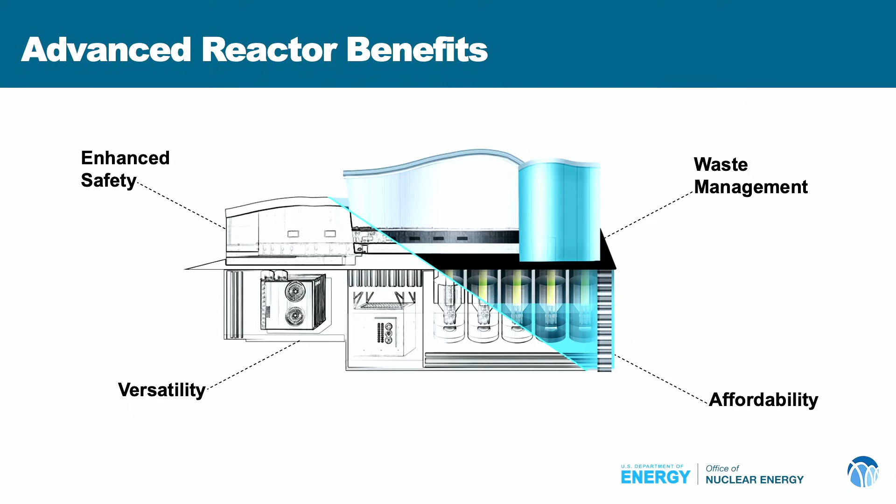But I'll have to paraphrase one Admiral Hyman G. Rickover, who, in the face of advanced reactor types long ago, many decades ago, said there's a difference between advanced reactors and the reactors that are operating today. I'll paraphrase him: advanced reactors are cheap and use off-the-shelf parts, and they're going to be smaller and more versatile and more affordable, but they're not being built today. Reactors that are built today, of course, are big and complicated, and they're stymied by seemingly simple engineering problems, and they are being built today.

This is approximately still true, though there's a slight distinction. A number of advanced reactors are being built today, and actually this week, one advanced reactor has gotten a certification from the NRC to proceed with construction for a test unit. We'll talk a little bit about the Hermes reactor very shortly, but I think the quote that has been so persistent in this space from Rickover is kind of nearing the end of its utility.

All right, so advanced reactor designs. I promise it'll get more complicated very soon, but let's start with this. If you were going to design an advanced reactor, you would be facing a number of key questions. Primarily, what do you want it to do? We'll call these the performance targets. You have a number of things you can fool with to reach those performance targets.

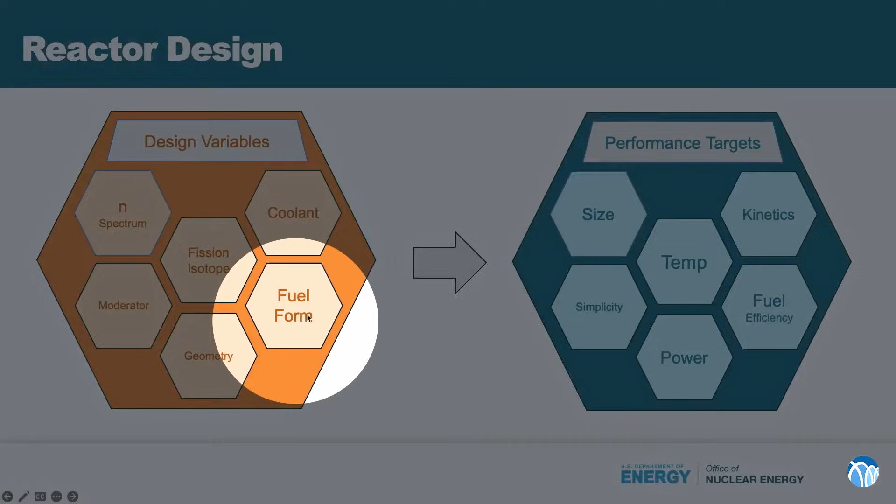So over the course of this talk, my intent is to go over some of these choices you might make, and comment on how you get to the performance targets with different types of reactor design choices—whether it's your neutron spectrum, the coolant choice material that you choose, the fission isotope that you select, what kind of moderator, we'll talk about moderation in general, what geometries you might choose, what fuel forms you might choose, and how that affects some of these key performance metrics. So let's get started. All right.

Just as a review, many of you do not need a review of nuclear physics. However, for those of you uninitiated, neutron interactions have two major types: scattering and absorption. In scattering, it can be elastic, like a billiard ball—it just bounces straight off one to the other. Or it can be inelastic, where it absorbs some of the energy, maybe kind of like two squishy pieces of Jell-O bouncing across each other. There's maybe some energy absorbed in that interaction in a specific way.

And then absorption: there's fission, which is the splitting of the atom, the release of energy and additional neutrons. Typically there's capture, where maybe you absorb the neutron and a gamma particle is released. There's a different kind of reaction where a neutron is captured and all kinds of other things can come off, whether it's a proton or 2 neutrons or 3 neutrons. Or you have alpha particles, which is the emission of a helium nucleus after the absorption of that neutron.

All of the absorption reactions you can think of in the following way: a neutron is absorbed by the nucleus, and it enters an excited state. It's quite highly energetic and unstable. It has too many neutrons, and it needs to figure out some way to kick off some of that energy. In some cases it's an alpha particle, sometimes it's 2 neutrons, 3 neutrons, sometimes it's a gamma particle. And sometimes that atom splits—and the splitting of the atom is, of course, fission.

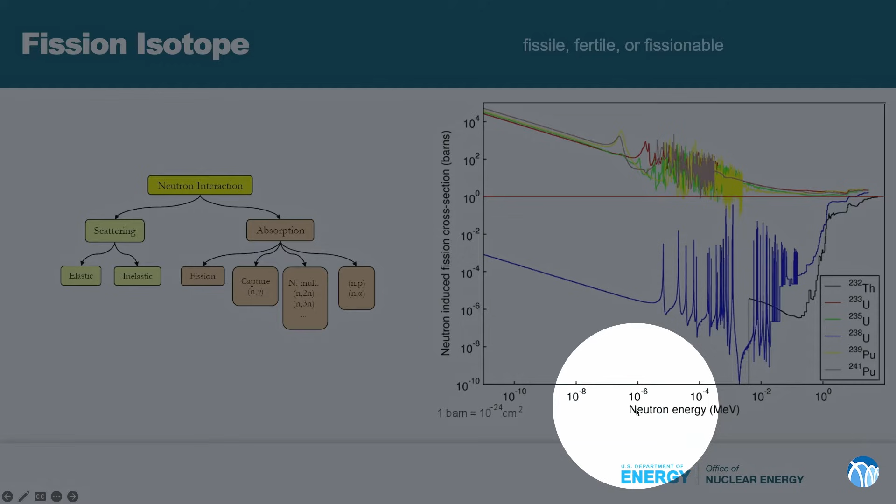This matters in your selection of fuel isotope. So the key options are approximately these: thorium-232, uranium-233, uranium-235, uranium-238, plutonium-239, and plutonium-241. In the thorium-232 and uranium-238 space, the cross-section is quite low. This is a log plot, and the probability is just quite low that this reaction will happen—the fission reaction in particular, right?

But it's possible, and in fact, the higher the energy of the neutron, that's what this x-axis is, the closer you get to converging on the same likelihood that you would see in these other fissile isotopes. But uranium-238 and thorium-232 are fertile isotopes.

They are not themselves usually used as a fuel because it takes such a high energy neutron to make them fission. Instead, you hope that they will absorb a neutron and become, in the case of thorium-232, uranium-233, which is, as you'll note from the graph, in this top set of fissile isotopes. Uranium-235, plutonium-239, also fissile isotopes.

Does anyone see a pattern associated with this? Oh, I'm not supposed to take comments and questions.

The odd-numbered ones are more likely to be fissile. The even-numbered ones tend to be fissionable or merely fertile. This is a feature of nuclear physics associated with instability and pairing inside the nucleus.

Now, why am I showing you this graph? Well, you have to pick a fission isotope. Your first question for your reactor is which fissionable isotope, or fissile isotope, or fertile isotope am I going to use as fuel? Taking a quick look at this graph, it seems like you probably want to avoid these less probable isotopes and stick with some that are very probable.

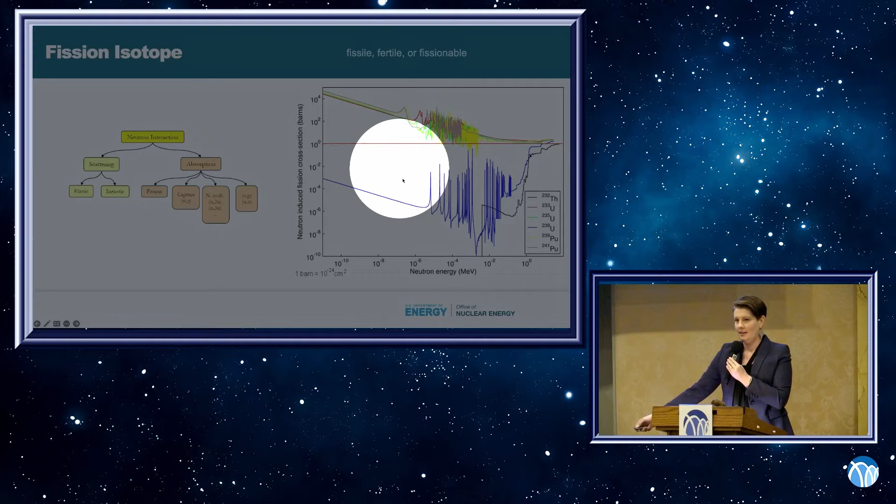This lump right here is in what we would call the thermal energies, and it's nice and likely that a fission is going to happen. And so a critical component of the neutron fission reaction inside a nuclear reactor is slowing down the neutrons.

They're born from fission way up here in the 2 MeV range, okay? And they have to make it either through this resonance region and create a fission inside the resonance region, or ideally, they come all the way down to these slower speeds and are captured in this very large and predictable resonance here, this big lump.

The importance of predictability is, of course, control of the reactor and a number of other things, but slowing down those neutrons from where they're born to where they're most likely to be conveniently fissioned is called moderation.

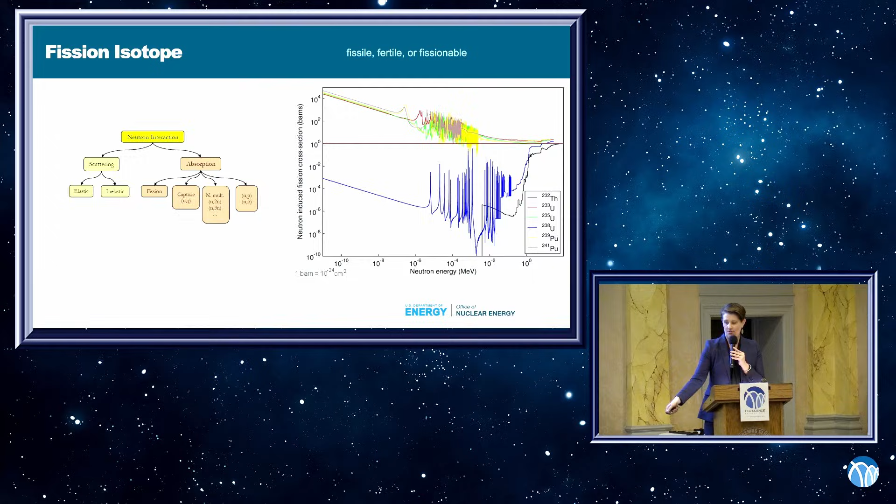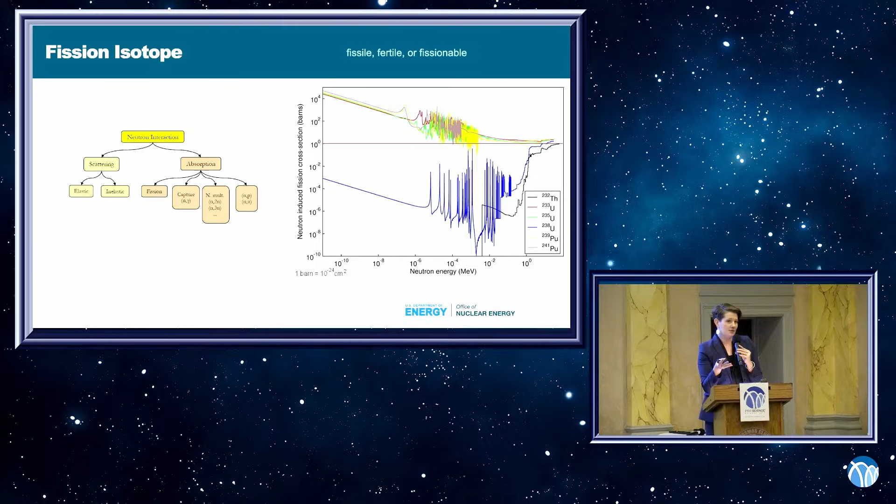And we often refer to these slow neutrons as thermal neutrons because it's at this low range where they're in thermal equilibrium with the uranium atoms themselves. So you can think of them as slow, and I'll refer to them as slow throughout this talk, but when I get a little lazy and excited, I'll probably refer to them as thermal, and that's what I mean. Thermal neutrons are in this slow region.

So what you've learned is you probably want to avoid relying entirely on these less likely isotopes to fission and stick with the really good ones, uranium-235, uranium-233, plutonium-239. However, we do build in a number of these other isotopes through the capture reaction.

So interestingly, as you fission uranium, of course, it creates fission products. The halves that are left behind, half of a uranium atom, is going to be part of the fission product set. And you can see a number of these fission products grouped together in this one plot.

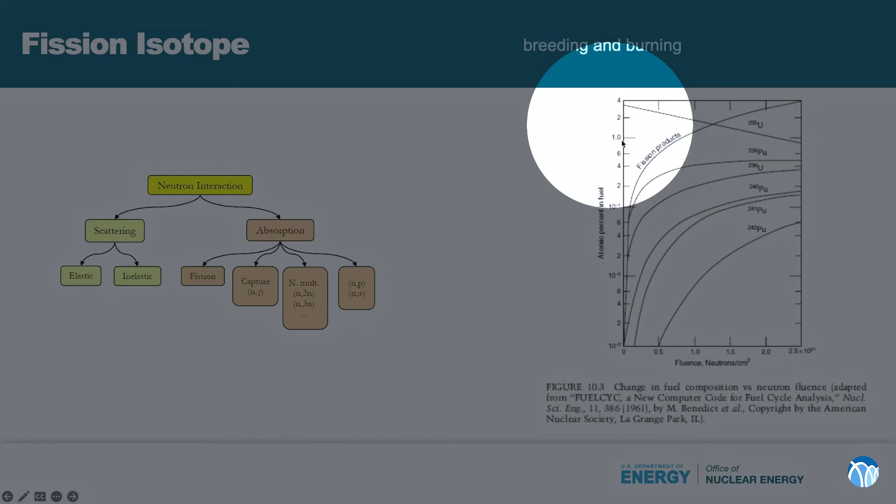So what we're looking at on the right-hand side here is the population of the fissile isotope that we're fissioning as a primary fuel, in this case, uranium-235, over fluence, so over time in the reactor. What happens is you start with uranium and nothing else at time 0.

And then as you burn up that uranium, as you split uranium atoms, you build up other things. You build up continuously fission products. This is a log plot, so that nice smooth curve is basically a linear sort of growth of that fission products. Not quite linear because they do absorb other things. And then you have plutonium-239, plutonium-240, and also 241, 242, much less common.

A critical component is that these slopes are different, and they're almost imperceptibly different if you aren't used to looking at this graph. But importantly, plutonium-239 is created at a pretty high rate, but then it starts to level off. That's not just a function of the log plot, but also a function of fissions in plutonium-239 in a standard light water reactor.

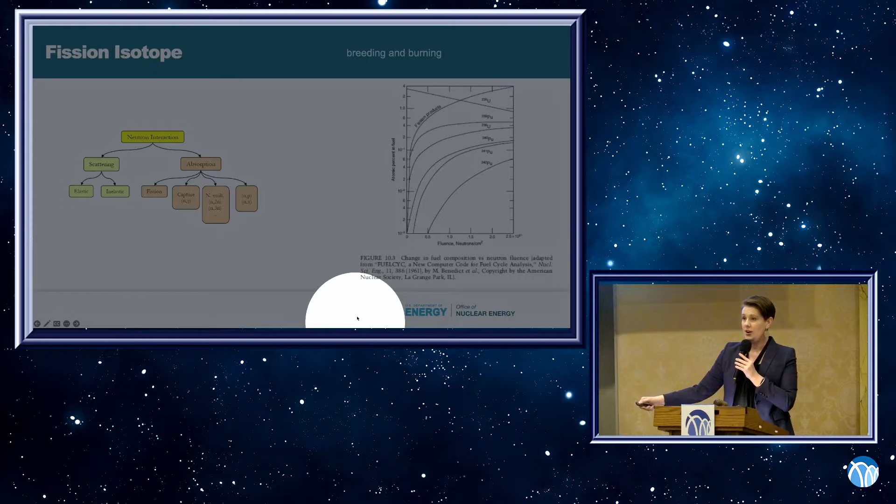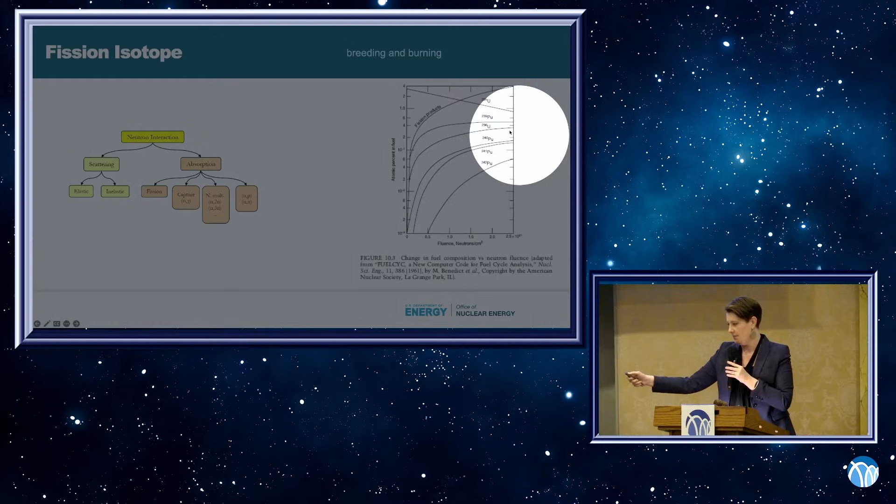So what's happening is you're creating plutonium-239 through the absorption of neutrons by uranium-238, one of the key isotopes in uranium-235-based fuels. It also has a lot of uranium-238. You build up more plutonium through the absorption and conversion of these neutrons into plutonium-239. And then it fissions—it's now a fissile isotope, and it's in your reactor.

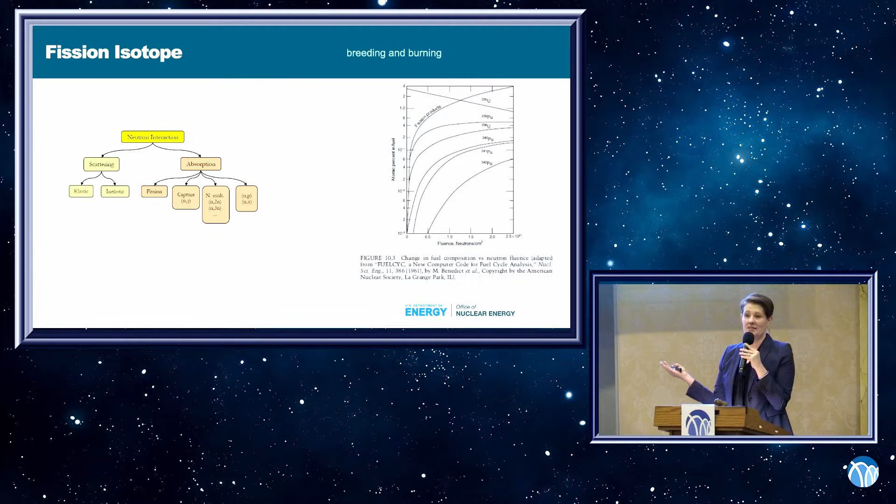20% of the power generated inside a standard uranium-fueled nuclear reactor comes from plutonium fissions, from this process. So you may think you started your reactor design by choosing a uranium-based reactor, but in fact you've chosen a uranium and plutonium-based reactor. This is a mere fact of the nature of this particular reaction set, and it's going to happen in most reactor types.

No matter what fuel you choose, there's going to be some breeding, which is the creation of fuel like plutonium, and some burning, which is the splitting of those atoms into fission products. That mixture is a really delicate balance—but we were talking about baking earlier. You may choose a particular kind of balance for the flavor that you want, and we'll talk about that a bit, but I wanted you to have this basics.

Now let's talk about the fission products a little bit. There is another important distinction between these main fuel isotopes. The products that are generated in a fission—you have a uranium atom, it's struck by a neutron, it splits. It actually doesn't split in half; you can tell by this plot it tends to split into 1/3 and 2/3 buckets. What we're looking at here is the size of the resulting atom in nucleons and the percent yield.

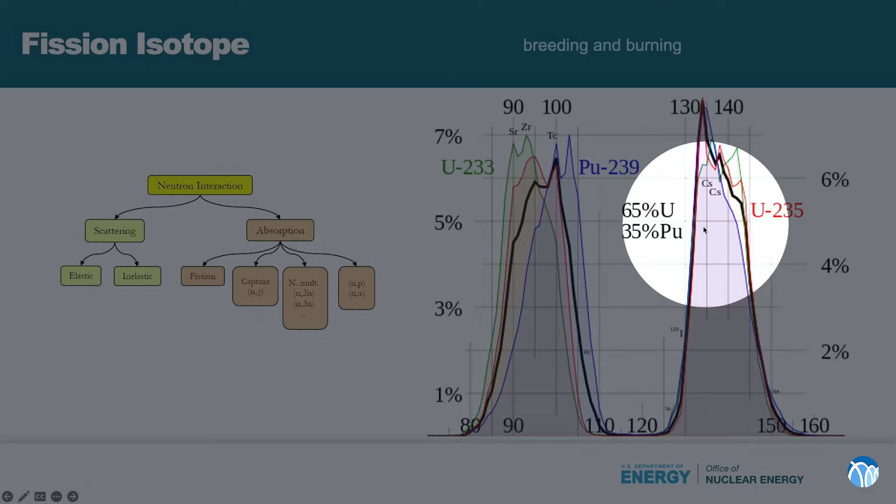There are different colors for different source fissioning isotopes, and you can see they're different curves. Uranium-233 tends to have fission products in the first bucket dominated by strontium and zirconium, whereas plutonium-239 and uranium tend to be dominated by technetium. There's a very dramatic difference in these slopes, and in the higher level bucket they're a little closer, but you still see a significant difference in the fission products left behind in a U-233-driven reactor.

So I just wanted to point out that another feature of how you choose your favorite fissile isotope is what kinds of fission products you are willing to have a large amount of. It may depend on whether or not you intend to recycle that fuel, whether or not you care about this. Most reactor designers are not going to care about this at all, but some are going to be really interested in trying to avoid some and not other types of fission products.

This 65% U, 35% Pu plot is intended to represent that kind of mixture you have in some light water reactors, where a significant percentage of the fissions are from plutonium, et cetera. Okay, here's an even cooler way to show you that data.

Importantly, I showed you the elemental data before in a single two-dimensional plot. This is actually, if you look in terms of nuclides, the heat map of the generation of various nuclides. You can read a nuclide chart in the following way: focus on the number of protons on the y-axis and number of neutrons on the x-axis. Every isotope in existence is plotted along this straight line, and you can create a whole bunch that don't appear in nature over the course of your operation of nuclear reactors—that's what's really cool about it.

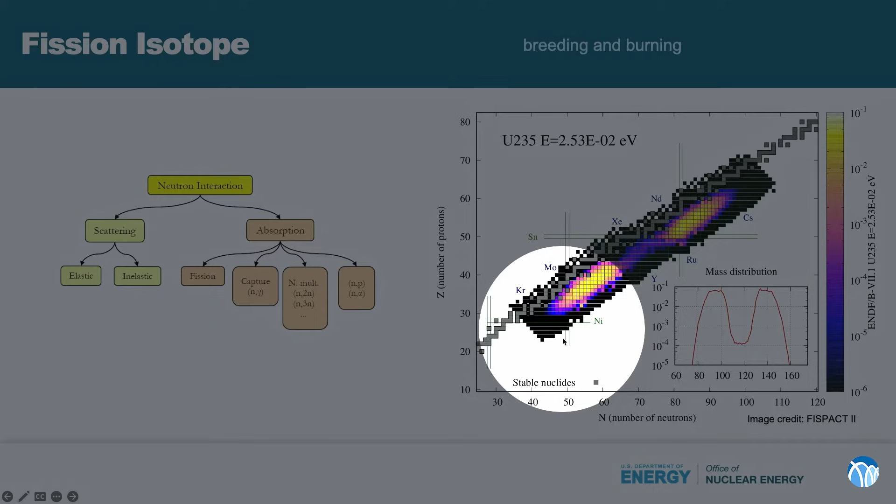And this is them—you can see that they appear in these two different sort of buckets. So you can see why you might care more or less whether they create more or less of a certain thing if you have some target at the end that you might recycle for.

So making this choice, now we're diving really deep. Once you've made this choice about your target fissile isotope, there's a critical component where it drives whether you're having your fissions in that really fast range or much slower thermalized neutrons. Do you bother with slowing them down, or do you just hope to have a lot of fast fissions before you hit the resonances on the slowdown?

And so that results in either a fast reactor, where you focus on the fast fissions, or a slow reactor, where you focus on the thermal fissions. It tends to be the case that this thermal type reactor, which operates in a moderated space with slow fissions, tends to be easier to design if you start with a uranium type fuel.

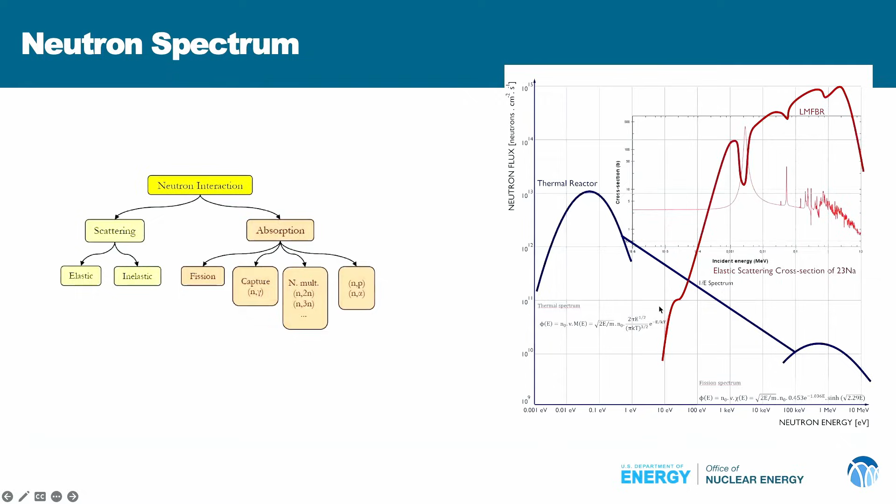And if you're really focused on breeding plutonium, it's going to be much more efficient to focus on fast neutrons. All right, so now you've got a little basic reactor physics. I promise it'll start moving a little quicker here.

So in order to slow it down, let's say you choose uranium-235, and you choose, therefore, that it's going to be a thermal reactor. You have to figure out what materials to put in your reactor to slow down the neutrons once they're born. They're born at 2 MeV. You need to move them down into this thermal range. How do you do it?

Well, there are a lot of different materials you can use in a reactor surrounding your fuel to moderate the neutrons. Now, standard nuclear reactor fuel in a light water reactor is a ceramic, so uranium oxide. It's in pellets in a big, long zirconium tube. And in the conventional nuclear reactors in the United States, that uranium is enriched so that the uranium-235 is a little higher in ratio to the uranium-238 than it was when it was dug out of the ground. That is around 5% U-235, 95% U-238.

Anyway, this long tube full of uranium pellets, uranium oxide pellets, has to be surrounded by something to slow down the neutrons. Slowing down is this reaction, the scattering reaction, and we hope that we're going to use that scattering reaction to lower the speed of the neutrons, right? So the neutron bounces at the atom, and then it bounces back off.

And so, in a billiard ball scenario, it's important to note that 2 billiard balls of almost equal size are more likely to lose energy in that collision in such a way that you can slow one down by hitting another one of equal size.

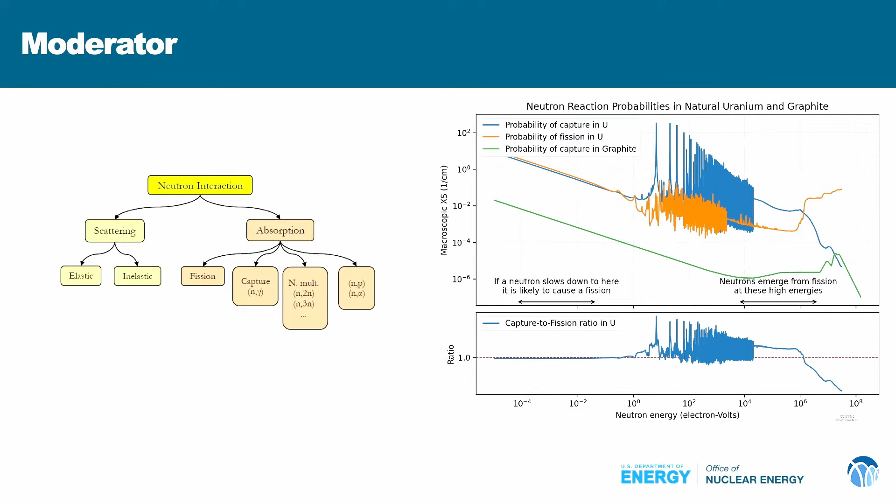All right, critically, therefore, you can choose materials that are similar in size to neutrons, right? Anything like hydrogen, really low in the periodic table, is going to be much better at reducing your speed. Importantly, what we're showing you here is graphite, right?

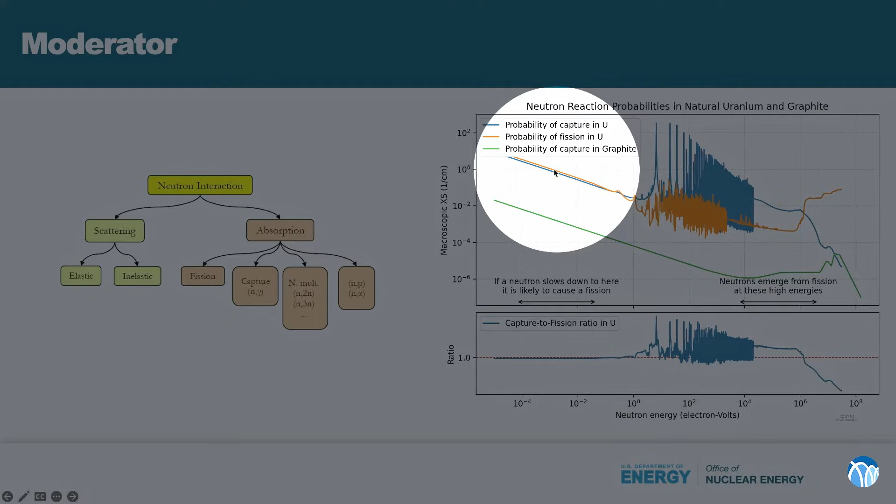Neutron reaction probabilities in natural uranium and graphite. You can see through this case, there's a probability of capture in blue, so you lose the neutron from the reaction. There's a probability of fission in uranium in this sort of orange color, and then there's the probability of capture in the graphite, right? So you want to avoid capture in the graphite and in the uranium, and you want to maximize the probability of fission. And so, way up here it makes a lot of sense, and then way down here it makes sense. You want to get this capture to fission ratio as fission-y as possible.

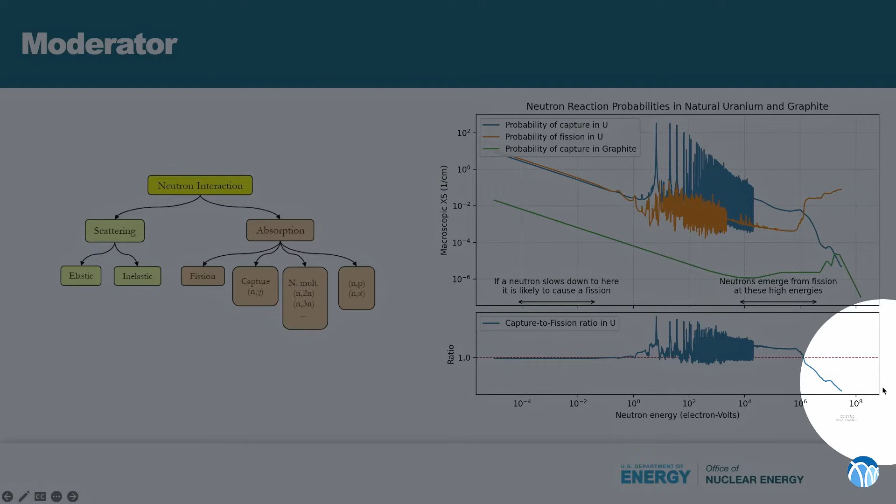So that's how you choose a moderator. Generally speaking, in light water reactors, we choose light water, unenriched water. A critical component of making your decisions is whether or not your uranium atoms are enriched in that fuel. In Canada, they don't enrich the fuel. Instead, they enrich the water. And so they scatter the neutrons more effectively using deuterated water, deuterium-2O, if you will.

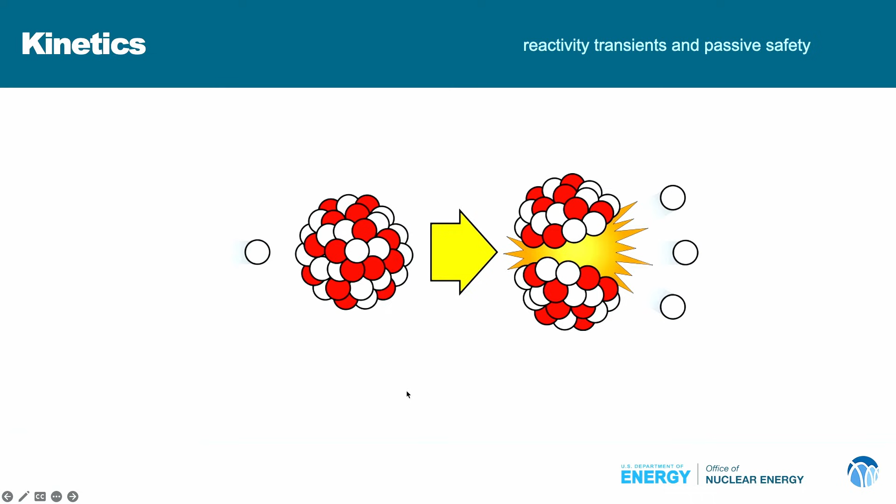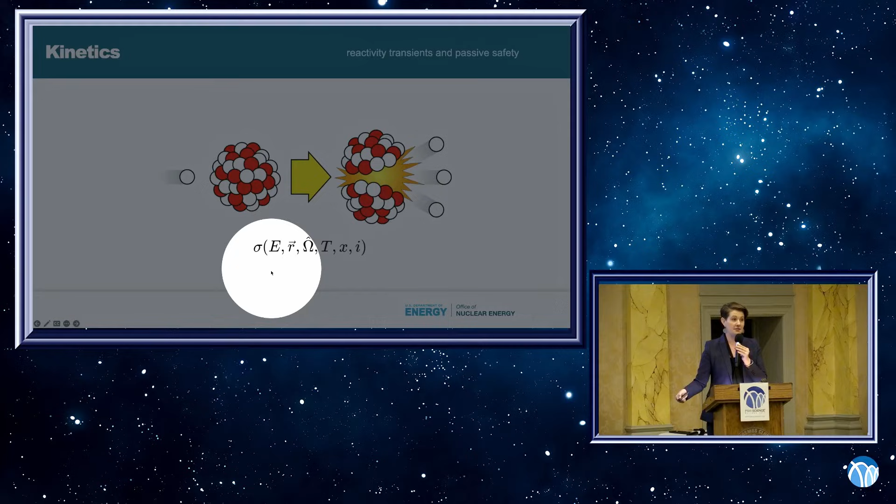What we want to see as critical to this is that the cross-section in barns, the probability of this fission - you can think of this cross-section in barns as the probability of a fission - depends on a whole bunch of other things. It depends on the energy of the neutron coming at it. It may depend on the material of that particular atom, it may depend on the angle at which things are happening, so that's omega-hat. It may depend on the isotope that it's hitting. It's going to depend on temperature of the isotope, and I'll talk about that mattering in a minute. But it depends on a whole bunch of things: how the neutron strikes the atom, how fast it's moving, where the atom is, etc.

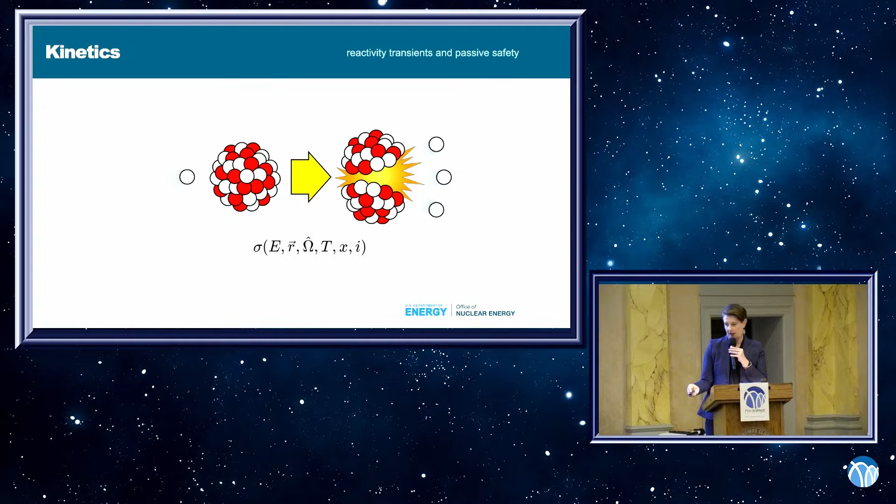Because it depends on all those things, these can create feedbacks. This is the source of the feedback: the dependence between the energy, the temperature, and the isotope on the probability of a fission itself. So fissions can cause changes in temperature, and changes in temperature can cause changes in the probability of fission. You can see where these feedbacks come from. I'll show you another diagram in a second, but this is really important for the accident transients.

Now I told you that we create 2 or 3 extra neutrons. Those 2 or 3 extra neutrons in a chain reaction, of course, are meant to create more fissions.

Ideally, one will reach a generation to generation ratio of exactly 1. A critical reactor has a scenario in which one fission causes another fission, then another, in line. One fission does not cause 2 fissions, as in this diagram. This diagram is a supercritical reactor, which goes above K = 1, a scenario with a growing reaction.

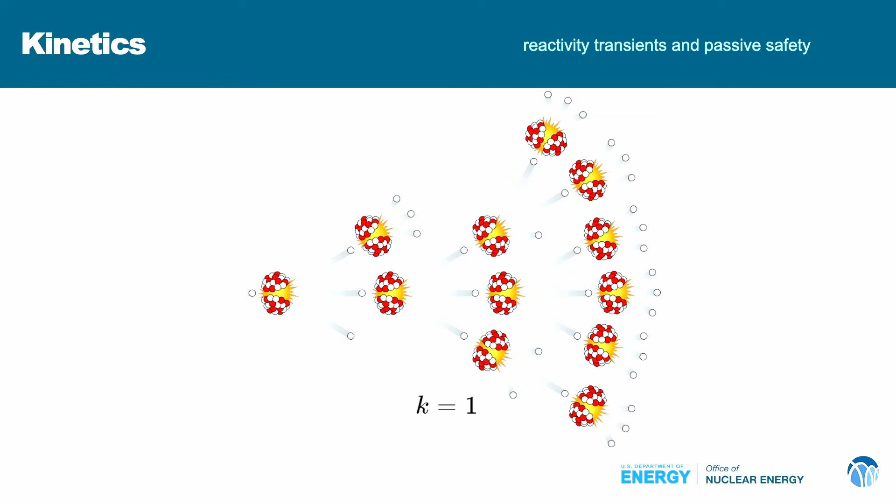A subcritical one would be as if each fission caused slightly fewer fissions in the next generation. So you have to hit exactly one neutron of these 2 or 3 that makes it to create a next fission. This is all a carefully balanced dance between the fuel material, the moderator material, the temperature of the reactor, and a number of other things.

So in the context of kinetics, the behavior in an accident, what we're trying to avoid is a scenario in which we accidentally change this probability so much that we take a critical reactor, with 1 fission for every fission in each generation, and accidentally make it a supercritical reactor. Or if we do really badly, we make it what's called a prompt supercritical reactor, and it goes way, way over power quicker than we're able to respond. We'll talk about prompt versus delayed in a second.

So I said K equals 1. That's what we want - this is criticality. This is actually the neutron multiplication factor: the number of neutrons causing a fission divided by the neutrons produced by the fission.

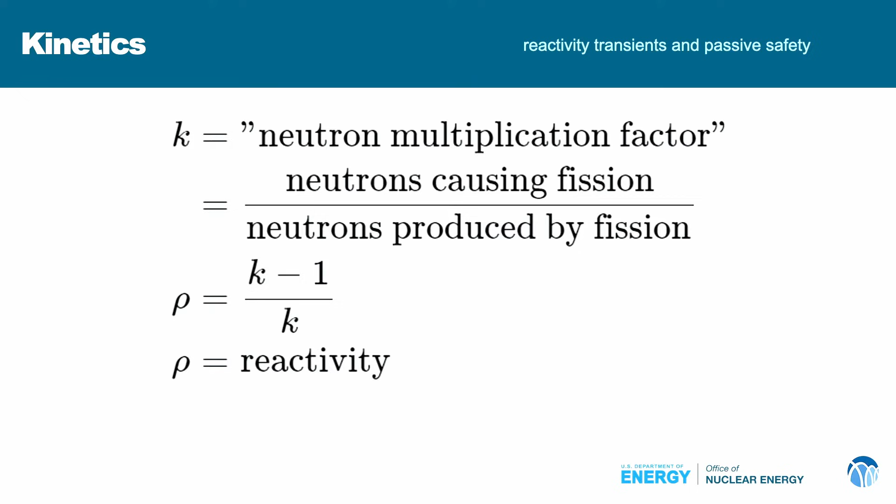You want it to be 1. If it's greater than 1, that means there are more neutrons causing fission than were produced in the last one. You can see what I just described verbally in a very simple equation. Reactivity is the difference between the actual criticality and 1, normalized by the criticality itself - basically delta K over K.

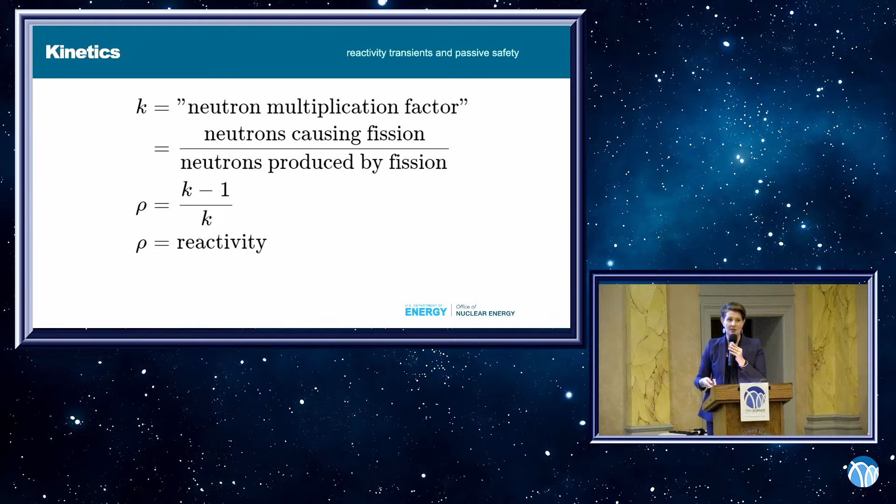Reactivity is the likelihood of going supercritical, going subcritical, or staying critical. If reactivity is 0, then K equals 1. If reactivity is positive, we have a supercritical scenario evolving. If reactivity is negative, we have a subcritical scenario evolving. A number of things matter to all of this, but the change in reactivity is even more important - you can change the likelihood of whether you're going to be supercritical or subcritical over the course of the reaction.

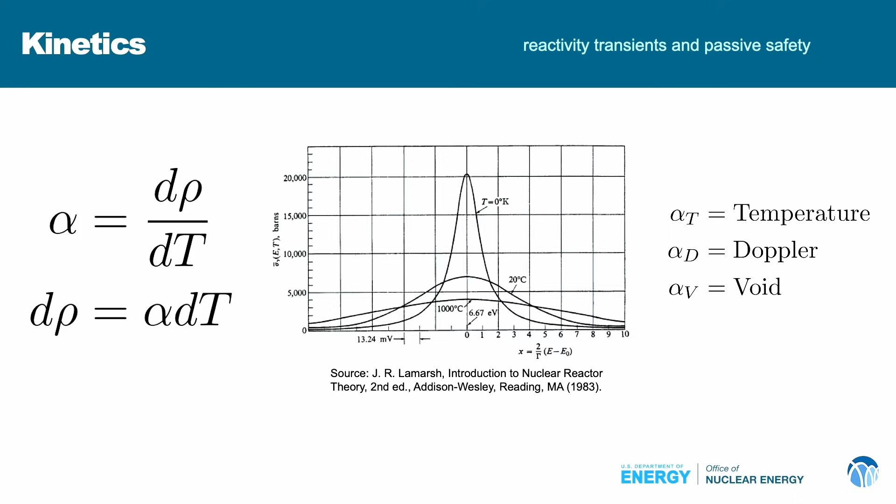One key feature is temperature. We want a natural physics reaction such that when the temperature goes up, the reactivity goes down. A way this happens is in the resonances - I showed you all those plots with the squirrely lines, those resonances where specific energies of neutrons are captured more readily by the nucleus. Temperature affects the shape of those resonances through the Doppler effect.

We're going to take a brief moment. How many of you have heard of the Doppler effect in any context? Yeah, it's in astrophysics, sonar, all kinds of stuff - it's in traffic, it's in a million different things.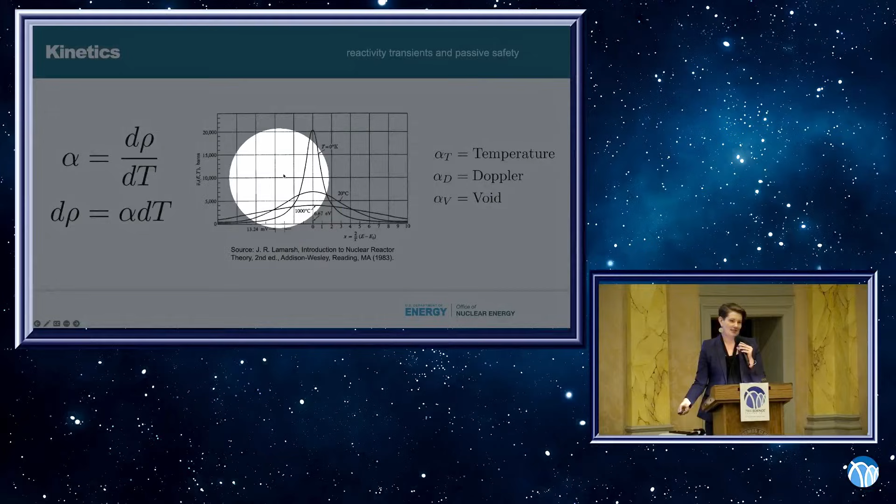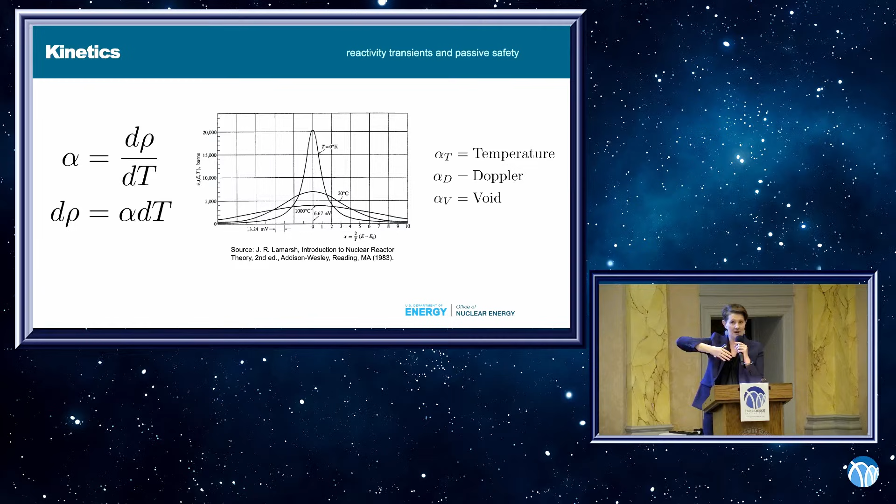The Doppler effect in the context of these resonances is basically this: as the temperature of the atoms increases, they wiggle more - this is the definition of temperature. If they're wiggling, they're now moving in relation to the neutron that might strike them, which changes the effective speed with which the neutron strikes them - much like the frequency you see from a blue star versus a red star, Doppler shifted blue or red, or the sound you hear as an ambulance approaches versus drives away.

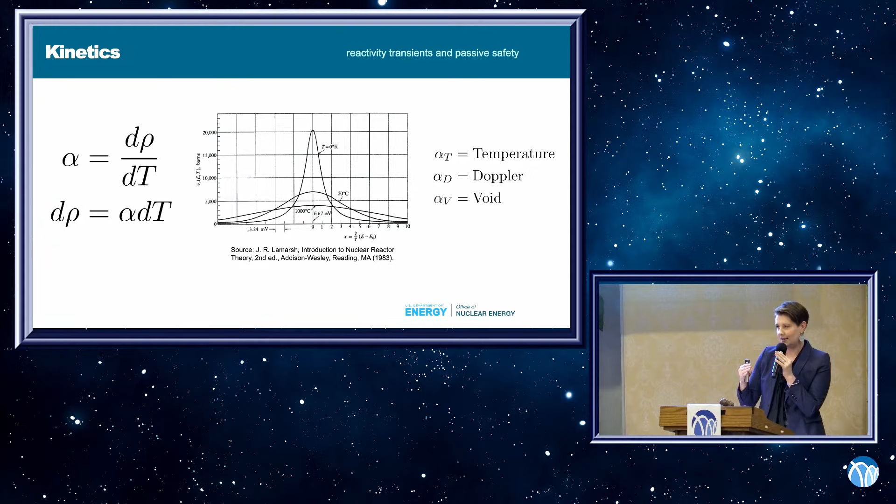This is extremely similar, and the effect is that it widens the resonance - that part of the probability graph where we can hit the right energy and the neutron is absorbed by the nucleus, maybe creating a fission. The Doppler effect is almost instantaneous - as the temperature increases in the reaction, it happens right at the fuel, immediately in the nucleus. So it's a really strong opportunity for feedback.

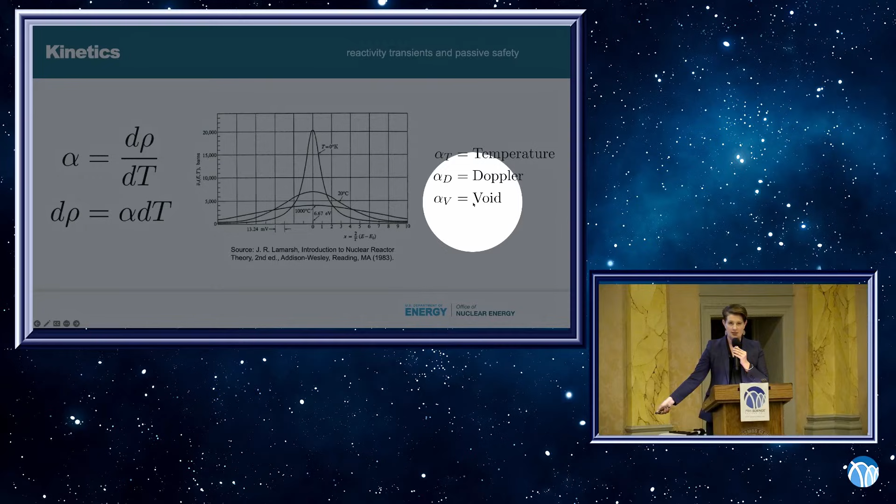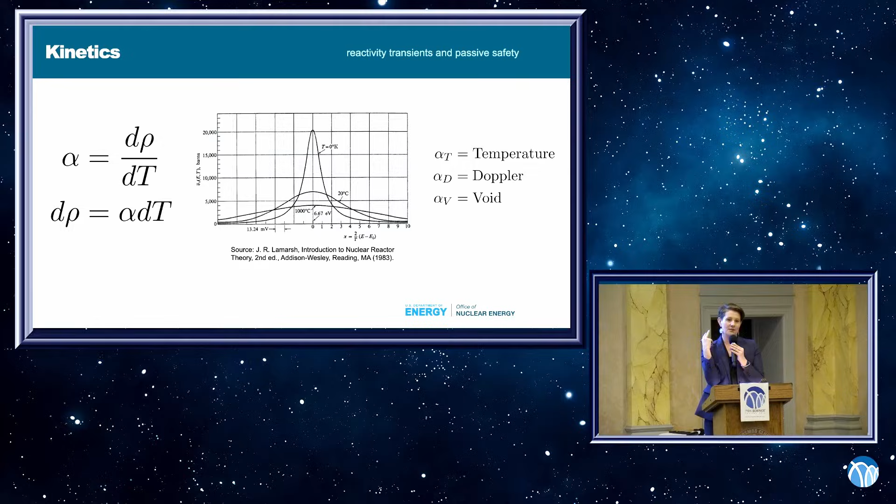Some Doppler effects are going to be positive, some negative. Widening and shortening is a nice feature - the probability, when it widens, also goes down in that middle bit of the resonance. But different materials have different resonances that you want to either Doppler or not. Anyway, the temperature feedback can be a combination of Doppler and what we call the void coefficient. There are a number of other possible contributors to this effect where we want to change the reactivity as a function of temperature, but the most important two are this Doppler effect and whether or not you're creating voids in one of the materials.

Voids are just an absence of molecules. In water, for example, when one heats up water, it boils and leaves voids. Any kind of change in density in the material changes the likelihood that you're going to run into an atom as you move along if you're a neutron.

We call this the void coefficient. Some folks would call this the material density coefficient, but I prefer the void coefficient. Anyway, if the temperature feedback coefficient is negative, then you have negative change in reactivity as a function of temperature. If it's positive, then it's positive, and same with voids.

They can compete with each other, so you might choose to design a reactor that has a negative temperature coefficient with respect to Doppler and a positive temperature coefficient with respect to voids. You might not choose this intentionally, but maybe there are other features of your coolant that you like, that you'll keep around, even though it has this downside of creating more reactivity when it boils. This is the case sometimes with sodium-cooled fast reactors. I hope this is clear as mud.

All right, so we're almost done with our kinetics 101, I promise. The reactivity, the feedbacks, are some sum of those coefficients of reactivity - Doppler, void, whatever - and the change in temperature itself.

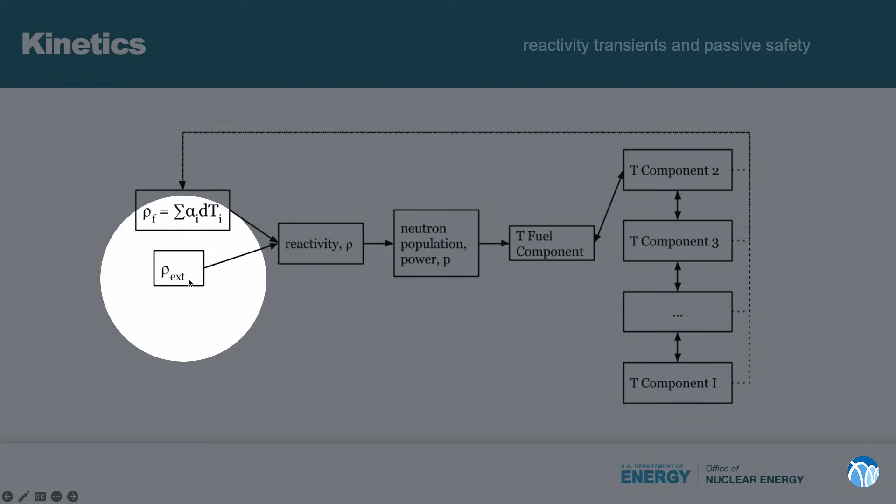Now, the thing I'm not describing here is the external reactivity. This is where the accident happens, right? You do nothing, and nothing changes in terms of the temperature. None of this happens, and you have no change in reactivity. It's all just reactivity equals zero, reactor's going on just fine.

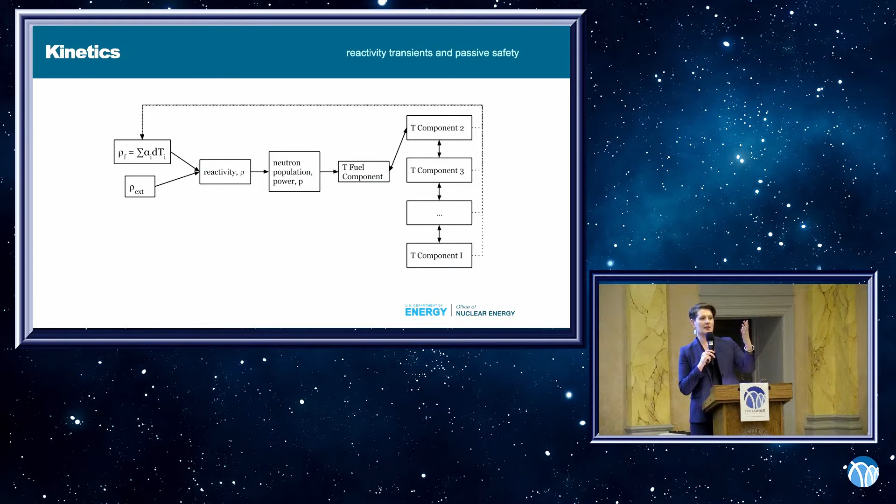But what happens sometimes is that maybe you take out some part of the reactor - for example, what we call a control rod. You might pull a control rod, increase the reactivity to increase the power of the reactor, and now you change the whole situation. And so all these things work together.

And what you want to do is identify materials that drive the reaction toward a stable state.

One interesting problem with all of this is that it does not happen instantaneously. Some of it happens instantaneously, but some of it happens on a delay. And if you ask me, it can be a problem, sure.

It makes the whole thing very complicated and stops being a sort of interesting ordinary differential equation, and starts becoming like complex analysis. Those of you who've done complex analysis, it is really annoying to find those roots, et cetera, but that's how we solve reactor accident equations.

It's because that fission product - half of the uranium atom, for example - about 50-something of them tend to be so unstable at the end of this splitting that they kick off a neutron a little late. They don't do it instantaneously. There are the neutrons that come out of the fission initially, but then you're left with these fission products, some of which are somewhat unstable, and then they kick out a neutron. Now that's contributing somewhat later to the whole reaction neutron balance that we talked about.

These are called delayed neutron precursor atoms - the fission products that tend to kick off a delayed neutron later. Delayed neutrons: first of all, the prompt fission reaction happens in 10 to the negative 14th of a second, all right? So a fission happens, bam, now you've got neutrons. You've got energy, it's all happening at 10 to the negative 14 seconds.

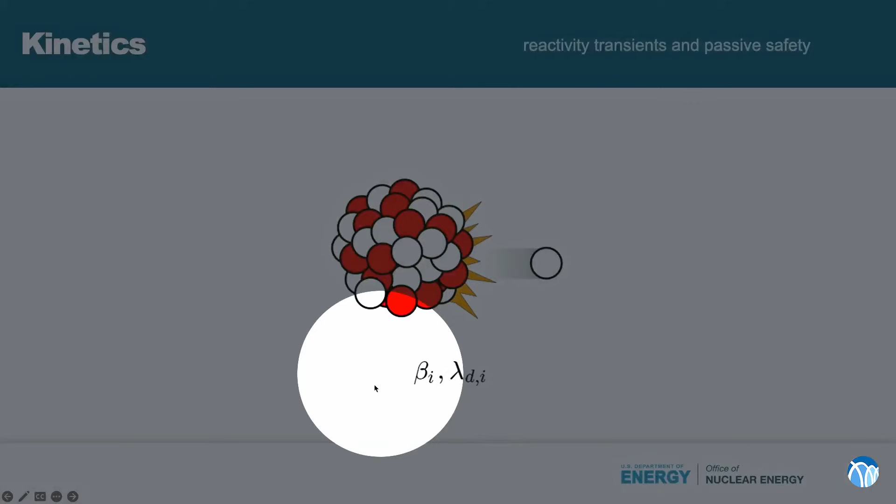And we describe this in a number of ways. We have the decay half-life. Bromine-87, we said it's like almost a minute, and which group it's in. We couple all these things together, and we get a kinetics equation.

It's almost 9 p.m., so I won't make you think too hard about this particular equation, but this is what we call a stiff differential equation. This is a version of the equation I can write on the slide because it treats the entire reactor as a point. It completely ignores geometry, and it's the only way you can write it down on a single slide.

It depends on a number of things, and that's the point of me showing you this. The reactor power itself is the thing you're solving for. It's this first equation, but it relies on a number of things, like the reactivity, which itself depends on time, the temperature of the fuel, the coolant.

The moderator, the reflector. It depends on time now because of those delayed neutron precursors. It depends on the fraction of neutrons that are delayed, the fraction of delayed neutrons from each precursor group, the concentration of each precursor group, the generation time. This mean generation time I won't go into, but it's broadly the time constant of the reactor.

The decay heat from various fission products, et cetera, et cetera, and the temperature of each component directly, not just as a function of reactivity. So it appears twice, the temperature. You can see this matters.

The reason I bring this up is that this is where reactor design becomes actually hard. You actually have to think extremely carefully about the balance between different materials in your reactor in terms of how it'll respond to an accident.

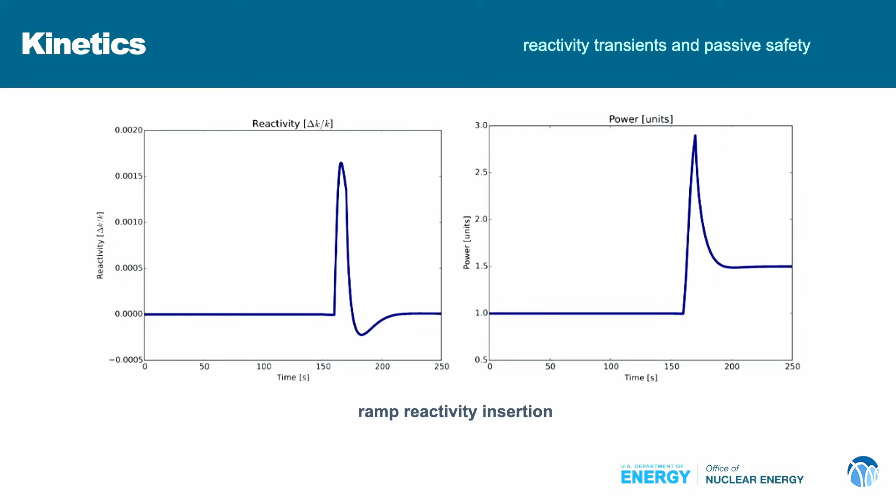And the power responds. It goes way up. In this case, it triples. But then it immediately starts shutting itself down, and not a single human interaction is required. The physics itself drives the power back down.

There are plenty of reactors that do this today in many ways. And I think a critical piece of making sure that you understand why advanced reactors are what they are, and where they should go with their futures, is that they should have this passive safety.

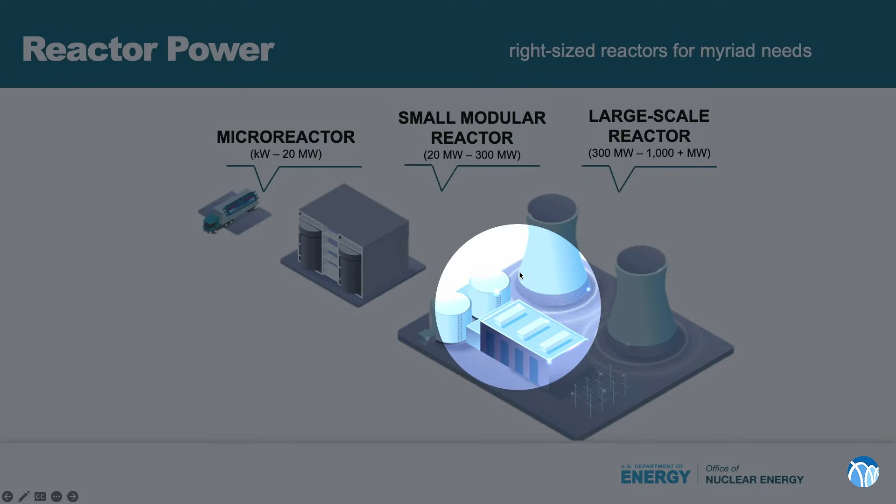They can come in different sizes. People are designing microreactors in the 20 megawatt space. People are designing small modular reactors in the tens or hundreds of megawatt space. People are still building large-scale reactors like the AP1000s out in Georgia in the 1,000 megawatt space. The idea here is that they're going to be right-sized for different kinds of applications.

But they're going to have different coolants, different fuels. We often talk about reactors in the nuclear reactor space based on their coolants. It's a weird naming convention, but we refer to the standard conventional reactors as light water reactors, as if that's the only material in the whole thing.

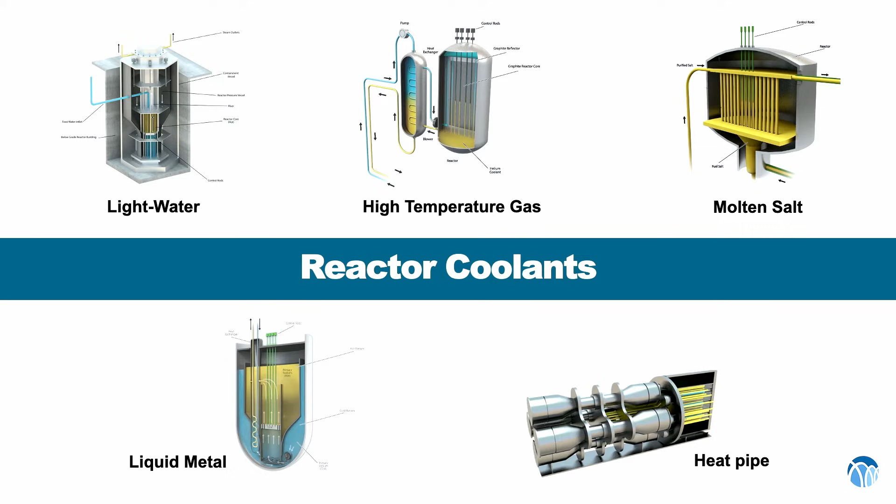It's not. It's just extremely important when you think about this kinetics question, when you think about whether it's moderating or not. Therefore, you get a notion of neutron spectrum, a notion of kinetics, a notion of the fuel type you can use with it, all from just knowing the coolant. So now you know why we call them this way.

That's the idea behind high temperature gas reactors. Molten salt reactors use chloride or fluoride salts. In the case of fluoride salts, it might be a fluoride lithium beryllium salt, really maximizing that moderation. In the case of chloride salt, they avoid that moderation with heavier atoms in the salt and try to aim for faster reactors.

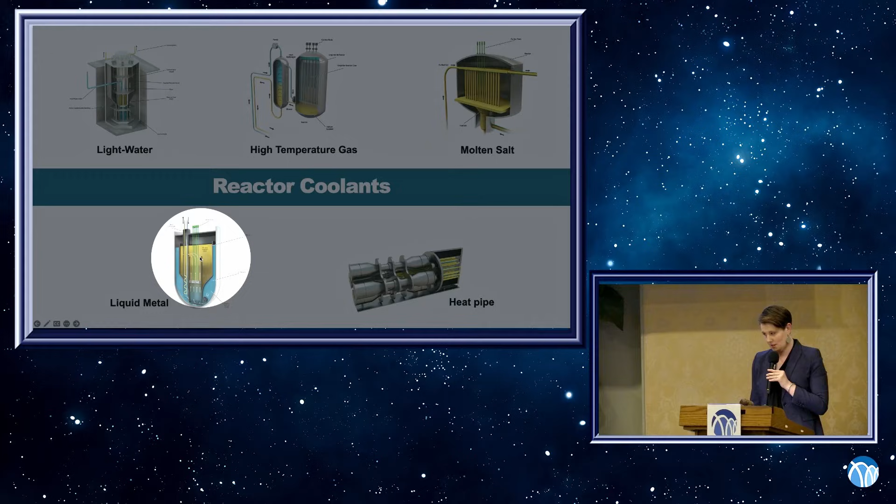Liquid metal. This is typically a metal-fueled, metal-cooled reactor, like a sodium-cooled fast reactor. Now, some of you are saying, wait, isn't sodium a salt? It is not a salt, it's a metal. This can be very confusing, but sodium on its own is a metal. So when we talk about sodium-cooled fast reactors, we are not talking about salt reactors.

And then finally, heat pipes. This is just a clever way to get the heat out using static capabilities.

I probably need a time check. It's like 9 p.m., so I should probably move a little faster, huh?

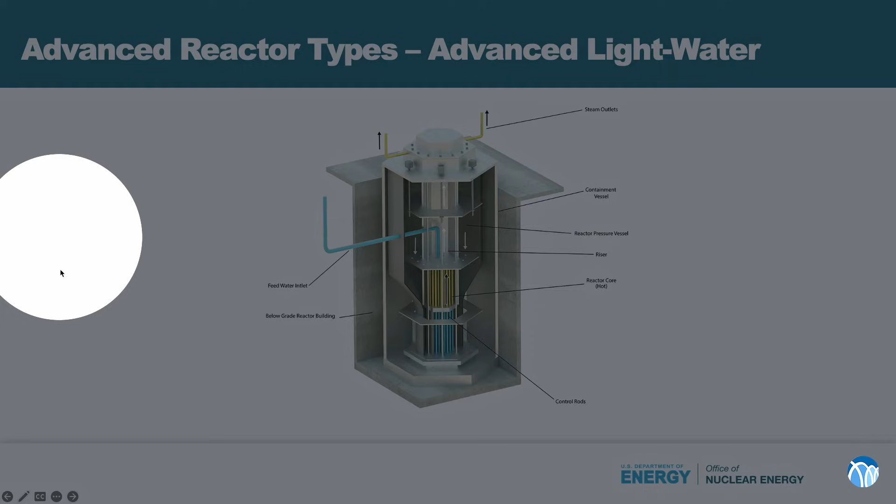Okay, light water reactors. Let me just walk you through a brief geometry and you'll get a notion. So the control rods are absorptive rods that you stick in just to suck up neutrons, all right? That's the idea, so keep that balance. The reactors are typically below grade. You have a containment vessel around the whole thing, and the fuel is just this yellow part. It's nice and hot. The water flows through, out, exchanges heat, runs a turbine, comes back in cold, etc.

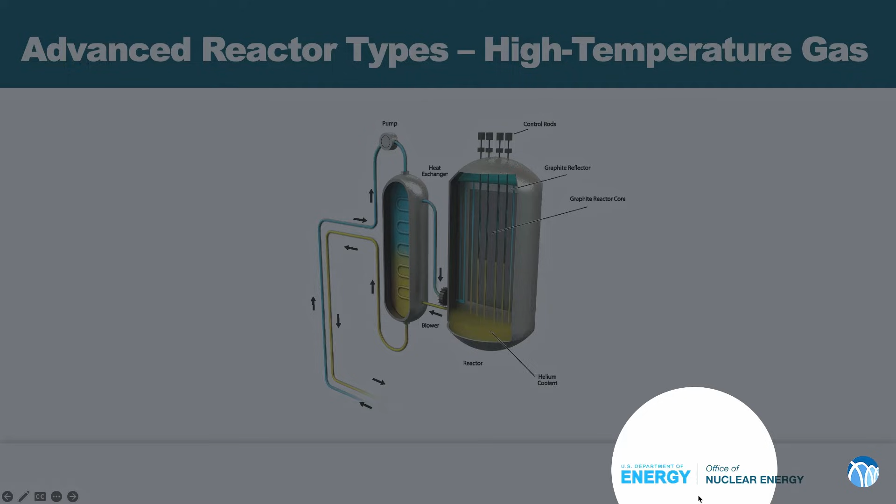In a high-temperature gas reactor, you're going to have a scenario in which the control rods probably come in from the top. You may use graphite as a moderator. Again, that's carbon. And your fuel may be in a prismatic shape, or in some cases, in a pebble configuration. I'll show you a picture in a minute.

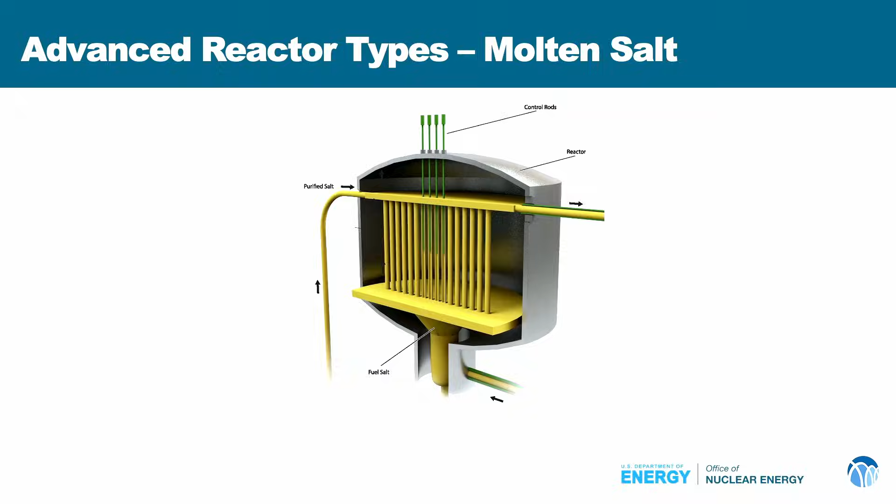Molten salt reactors, it's just a liquid pool, or sometimes it's a series of pipes. In this case, it's a series of pipes, and you have control rods coming in from the top, moving around a molten salt. That fuel salt has the uranium dissolved in it. And so the fuel is your coolant and your moderator all at the same time. Many people will tell you that a molten salt reactor can't melt down. Unfortunately, that's because it is already melted down. So, be careful.

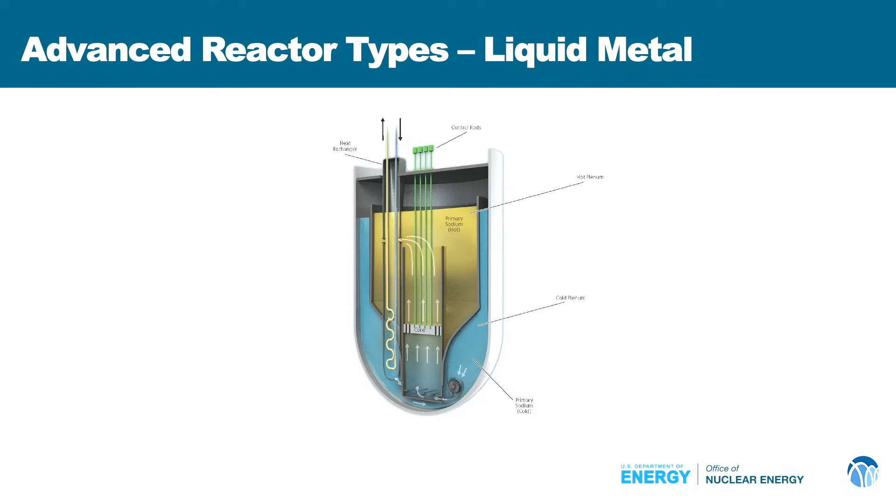But there are some downsides. Sodium, for example, is hard to see through. It's a metal, right? It's also pyrophoric with water, so it burns in contact with moist air. This has happened. There was a commercial sodium-cooled fast reactor in Japan called Monju, which did have a couple of minor fires. Not a huge radiological problem, but extremely challenging operationally.

We have a really excellent design that DOE is funding called the TerraPower Natrium design. This is Bill Gates' reactor, and it's based on this technology.

Heat pipe reactors are designed to be very small without a lot of moving around fuel, and they use the technology that chips use to move heat from one end of a static pipe to another using capillary action. And so you can take the heat out of the reactor straight to the other end of the pipe using really long capillary action.

All right, I recognize that I'm probably coming up on time, but do I have plenty of time? I don't have until midnight. All right. Oh yeah, I guess I started. Sorry, I can't count. All of this and I can't count.

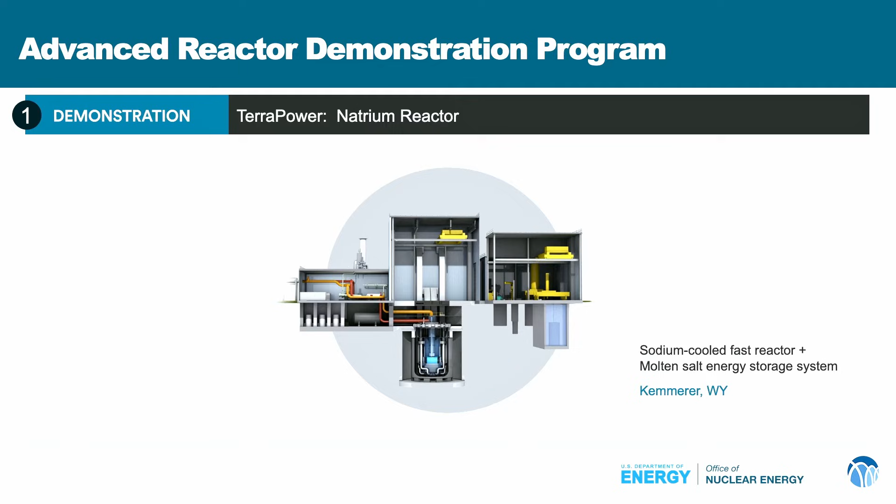Okay, so the TerraPower Natrium reactor is that design. Bill Gates has led a company called TerraPower. It has a couple of reactor designs. The one that DOE is funding in a really big way is demonstrating this reactor technology in Wyoming at the site of a retiring coal plant in Kemmerer.

It is a sodium-cooled fast reactor, and just to confuse everything I just said about salt and sodium, it has attached to it a solar salt energy storage capability. So it's a sodium-cooled fast reactor, which is a metal, not a salt, and it has a salt energy storage capability attached to it so that without changing the reactor power, you can change the power that you provide to the grid by alternating how much thermal energy you're storing in the salt. Very clever, but has created a great deal of confusion among the public about what's salt and what's metal and what's sodium. So I implore you, brilliant leaders, to help us with this conundrum in the public eye.

Anyway, the cool parts of this design, so you're looking at this design and you're saying, where's the reactor?

Below grade, below the ground, one would put the reactor core and any control rods and systems. Hot salt flows out to the hot salt storage system. Cooler salt flows in to exchange heat, and you have this nice solar salt well outside of the reactor space. You have a turbine building, and a place to store your spent fuel over here. It's pretty exciting. A big crane here and there, all just for moving the fuel around. And this part has to be pretty much water-free, okay?

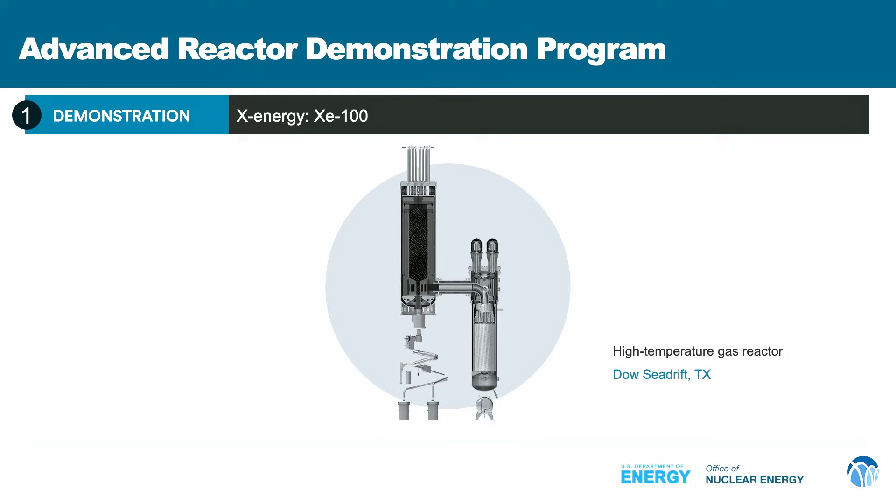That's the miracle of delayed neutrons that I'm not sure I actually ever got to in my discussion. If we did not have delayed neutrons, we would have no chance of designing a reactor that perfectly avoided reactivity transients that run away from us, because it would all happen at 10 to the negative 14th seconds. Delayed neutrons give us a chance to control the reactor.

Anyway, here are the control rods with which we do so. And in this case, this is the core itself. It's full of thousands of pebbles of fuel. I'll show you an example in a bit. And those pebbles are cooled by helium moving back and forth across this space. So it goes up and then in and then up and then out.

It's pretty high pressure, it depends on the reactor design. I don't know for this particular reactor, but you're looking at extremely high pressure, sort of megapascals, I think. Higher pressure than light water by at least twice, depending on the reactor. At least twice. Usually much more than twice.

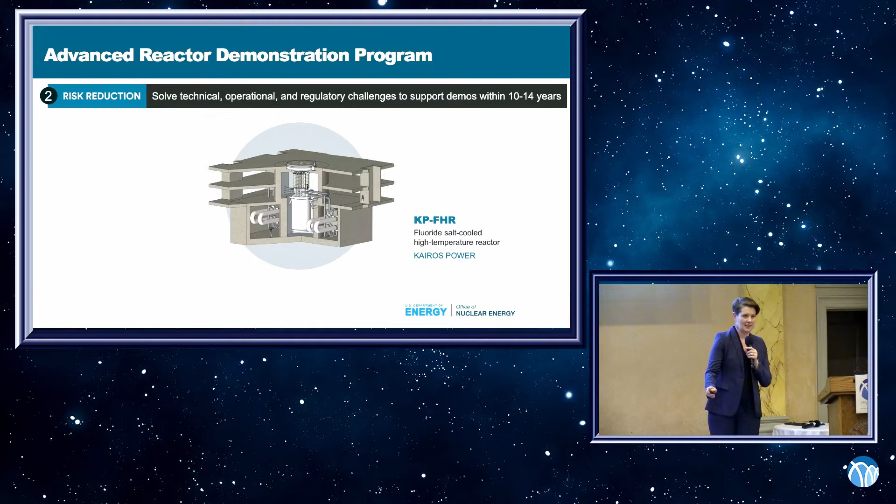The Kairos power reactor that we talked about earlier, having this nice accident transient, this is a pebble-fueled, salt-cooled reactor. Very cool. So it uses a Flibe salt to cool the fuel. It's fluoride salt, so it uses fluoride, lithium, and beryllium to moderate the neutrons. And it has all of the fuel in what's called triso fuel particles, which I'll show you in a minute. It's just like the X-energy Xe-100 triso particle fuel, with just some slight differences.

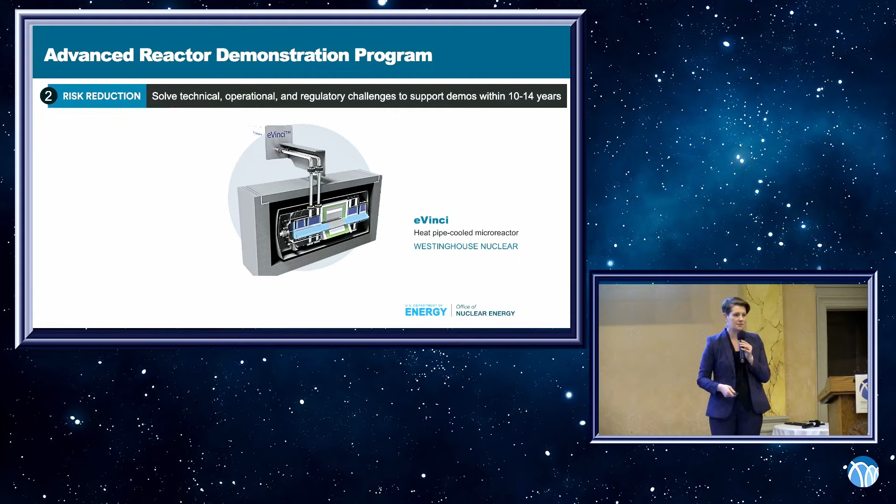Westinghouse is building an eVinci reactor under DOE cooperation. They've just created a heat pipe factory out there outside of Pittsburgh, and the intent for this reactor is to be quite small. The previous two are in the hundreds of megawatts. This one would be in the 5 megawatt range.

The BANR reactor is a BWXT reactor in the microreactor space, high temperature gas cooled microreactor, but very small, in the tens of megawatts. Holtec, we're supporting to reduce the risk of their commercialization. It's a small modular light water reactor.

Holtec is a nuclear company that's historically been focused on decommissioning nuclear power plants, and they have a whole factory in Camden, New Jersey, where they create casks for spent fuel. They've been doing this for decades, and that experience has given them a lot of know-how in creating what could easily be the pressure vessel for a small modular reactor. Their intent is to have a small modular reactor factory there in Camden with this small modular light water reactor.

We're running an experiment out at Idaho, our nation's nuclear flagship laboratory under my office. It's called the Molten Chloride Reactor Experiment, along with Southern Company and TerraPower, and it's going to be pretty cool.

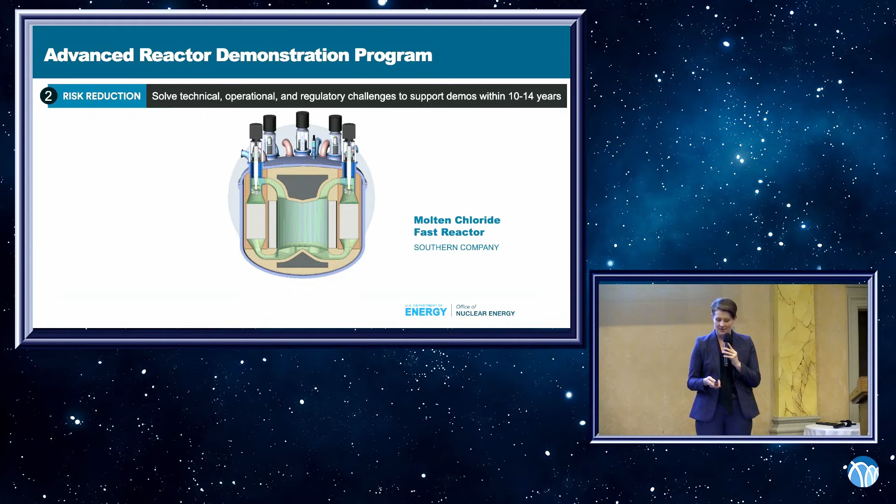There's a sodium-cooled reactor facility from Advanced Reactor Concepts that we're supporting. It's really similar to the TerraPower reactor, but quite small—again, below-grade sodium, a water-free zone, and then a bunch of other auxiliary stuff.

There's a horizontal compact high temperature gas reactor from MIT—this is very conceptual, but their intent is to demo in the mid-2030s. The fast modular reactor from General Atomics is also a concept to mature for potential demo in the mid-2030s. This fast modular reactor combines a number of these features, including being a gas reactor, but fast spectrum.

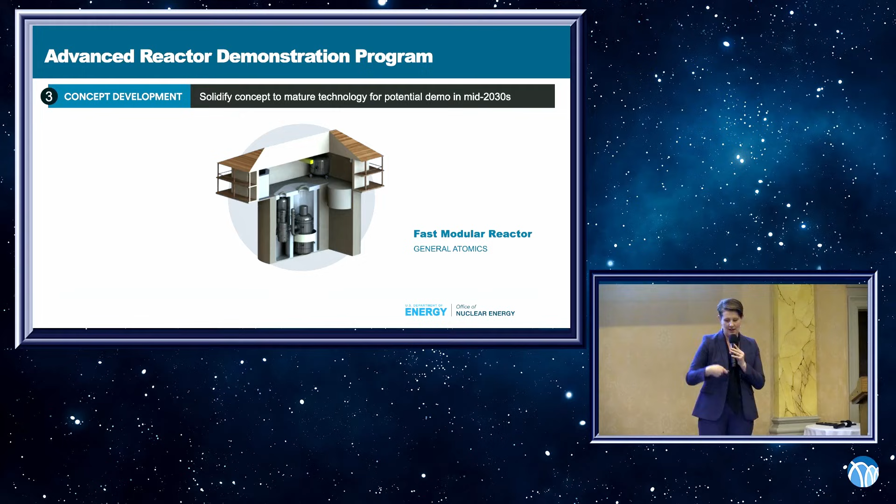NuScale Power is the first Nuclear Regulatory Commission certified U.S. small modular reactor. The idea here is it's a shrunken version of a light water standard reactor like the 93 reactors we have operating here in the U.S. today, but it combines not just the core features of a light water reactor, also puts the heat exchanger right there in a single power module. So what is usually outside of the reactor core space, outside of the pressure vessel—that heat exchanger—they put inside the module. That's the interesting feature of that reactor.

Marvel is a microreactor we're building out at Idaho, under Idaho National Laboratory oversight and guidance. It will be a DOE-authorized reactor. Through the Secretary of Energy's authority, my office gets to authorize this reactor, as if it's sort of the NRC of national laboratory reactors. That's pretty cool—we haven't used this authority in many, many years, and I'm looking forward to it.

I want to talk briefly about fuel forms. I keep talking about uranium oxide fuels—I described them earlier, but I want to be extremely clear about what we mean. A uranium oxide fuel pellet standard in a conventional reactor looks like this. You put it inside a cladded fuel rod, and then you collect a whole bunch of these, and they're quite long, meters and meters tall.

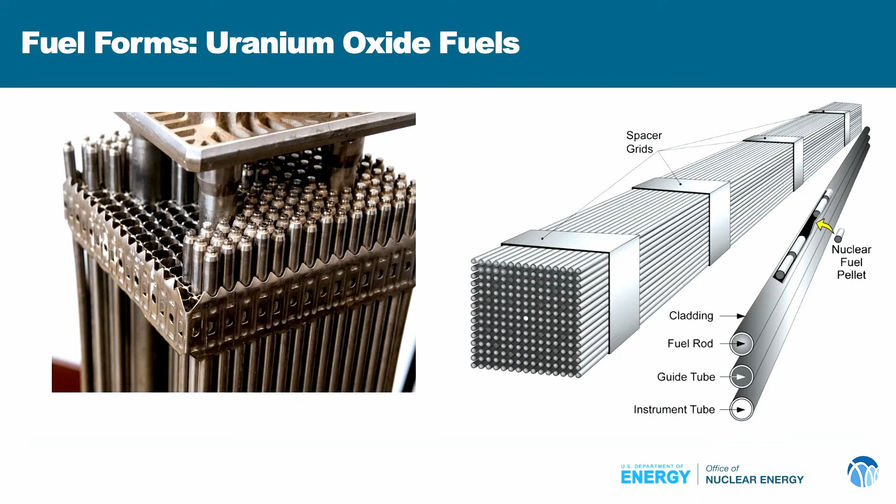Each little pellet has the equivalent energy of about a ton of coal. You have a bunch of these assemblies in a reactor, and it operates without stopping, without refueling, for 18 months to 2 years. Then you take out about a third of that fuel and replace it with fresh fuel. The volumes here are pretty critical, but it's a pretty nice, clean space. So when people talk about nuclear waste, I'll say commercial spent nuclear fuel looks exactly like this—this is commercial fresh nuclear fuel, and it's maybe a little wetter, sometimes with a little bit of crud on the top, but this is what it looks like.

So commercial spent nuclear fuel is not the Homer Simpson glowing green goo that you have been led to believe.

We're trying to advance these fuels in the Office of Nuclear Energy. Uranium oxide fuels can be clad with more clever materials. They can be doped with clever chemicals that enhance their accident tolerance through kinetics, through materials choices, through isotope choices—all identifying reactor physics that'll drive accident tolerance. Some increase the temperatures these fuels can withstand, others improve the reactor physics through kinetics. There are a number of different ones.

FeCrAl is an iron-based clad. Chromium-coated M5 cladding basically takes the exact same clad that we use in every reactor today and adds some chromium coating to it. Chromium-coated zircaloy adds a sort of clever clad with a chromium coating on it to reduce corrosion.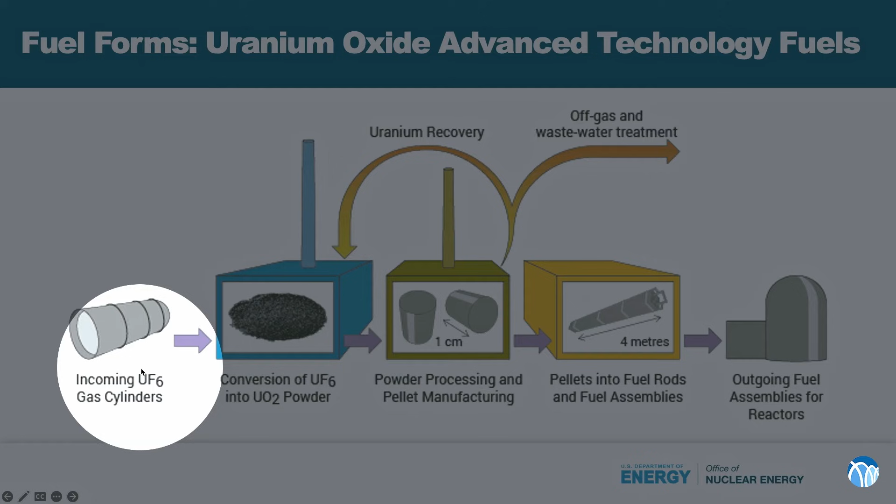General Atomics has used silicon carbide, which has an incredibly high melting temperature. The way we make fuel, for awareness, is you create a gas, convert it into uranium oxide, then press it into pellets and sinter it, and put those pellets into a tube. That's the fuel cycle process. To get to this, you have to mine it out of the ground and turn it into yellow cake, which is uranium U3O8, then convert it to UF6 and enrich it.

This is what Bill Gates' metal fuel looks like for a sodium-cooled fast reactor. Looks familiar, right? It looks really similar to a light water reactor fuel, except hexagons are the bestagons. In nuclear engineering, a lot of hexagons appear. There's a nice rectilinear function where you can make all kinds of shapes with hexagons in a regular pattern. You see it all over nuclear energy.

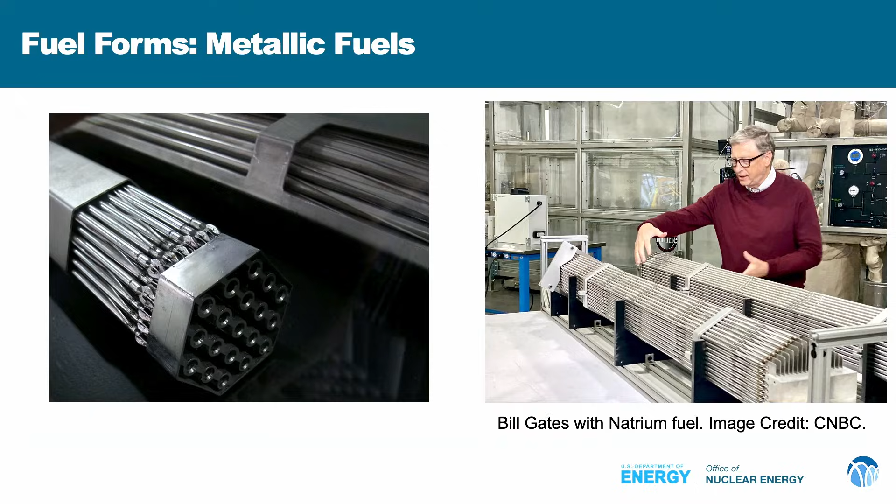Anyway, hexagons are the bestagons, and so this natrium fuel is really interesting. One interesting feature is that you can recognize metal fuels typically by this wire wrap, which is often used to make sure the metal coolant has flow around the cladding in a predictable way, which is less necessary in a pressurized water reactor.

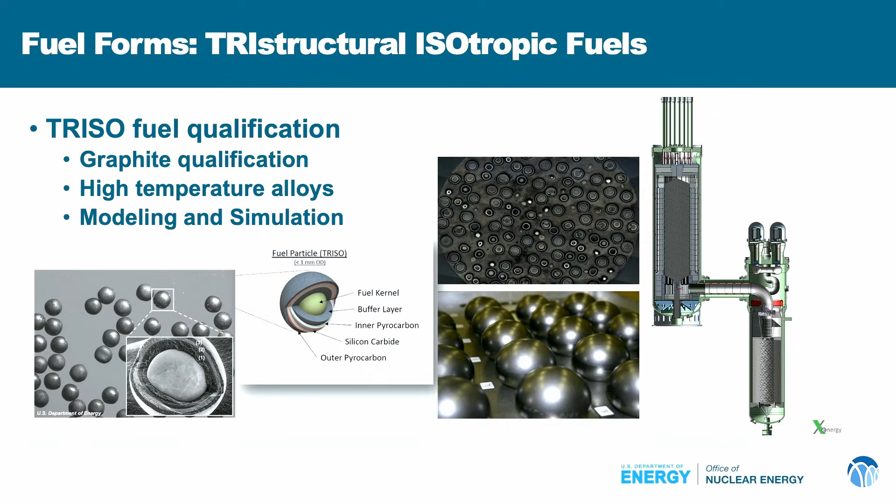One of the coolest fuels ever is tristructural isotropic fuel, TRISO. We in DOE have helped create this fuel through decades of research. You, as federal taxpayers, have contributed to it. Basically it's a containment structure around a teeny tiny chia seed-sized particle of uranium.

We take this teeny tiny particle in the micron range, and then coat it with buffers of silicon carbide and pyrolytic carbon until it's contained with some of the hardest material known to man. Those silicon carbides can contain the fission products at incredible temperatures for extremely long periods of time, well beyond accident conditions. So you've created tons of little containment structures in your fuel.

The dangerous fission products that are very radioactive, created all over the table of nuclides, well outside of the natural table of nuclides, are all kept inside that silicon carbide. These are used in a number of the reactors I've just shown you, all of the gas reactors, plus the Kairos Power PBFHR, that fluoride salt-cooled high temperature reactor.

These TRISO particles can be embedded in graphite pebbles or embedded in graphite cylinders. Here's what a pebble looks like - it's nice and shiny, a graphite pebble. And here's the inside of a graphite pebble full of TRISO particles that's been irradiated in a test reactor. You can see none of them are broken, and this one has seen quite a lot of high temperature and fission product expansion.

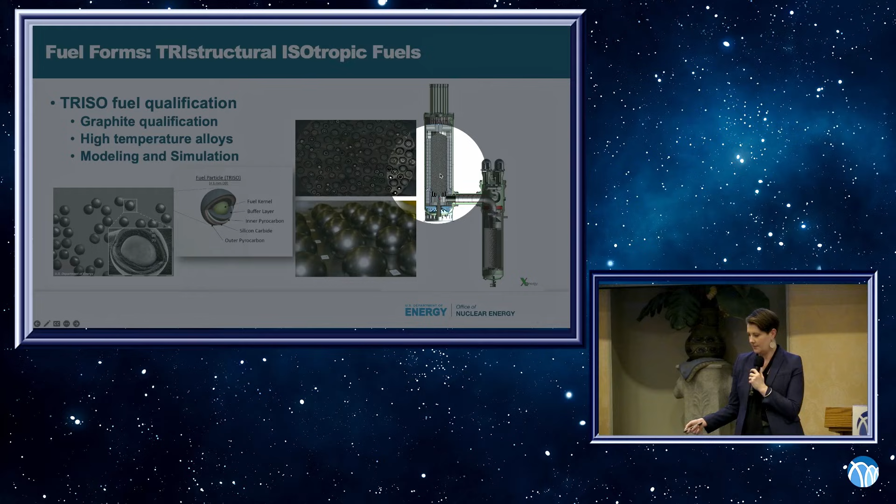This is what we put in the X-energy Xe-100 reactor, for example. These pebbles are about this big, the final pebble, and they have hundreds and hundreds of thousands of tiny particles.

The Ultrasafe Nuclear Corporation has a similar reactor design that's a high-temperature gas reactor, and instead of using pebbles, they have a big graphite block with big cylinders drilled in it, and they drop cylindrical versions of those pebbles into the tubes. So this is what you'd call a prismatic gas reactor, but inside are more TRISO particles.

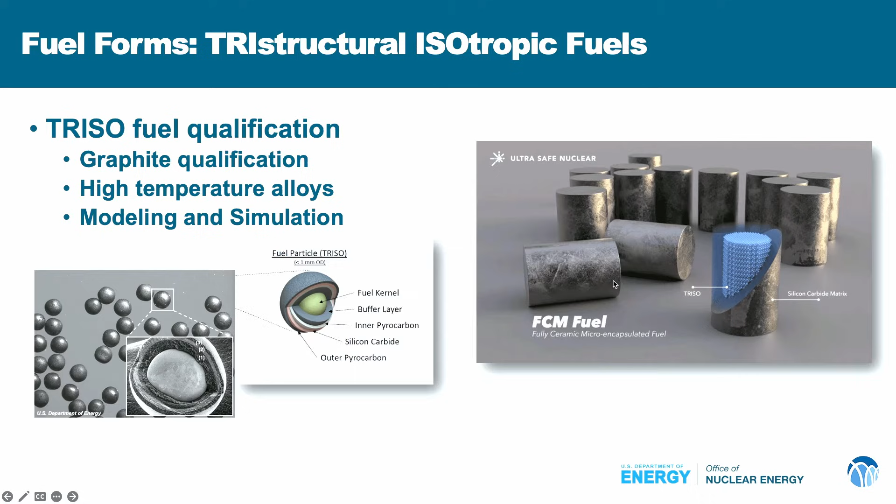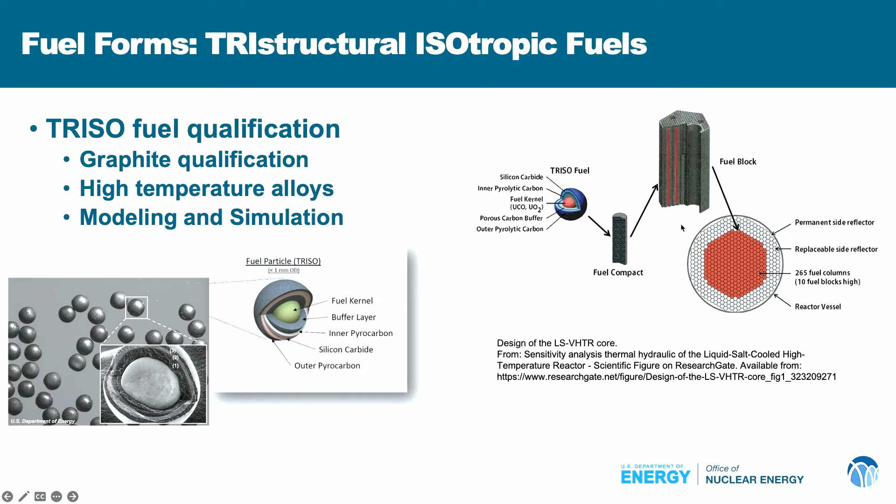Here's what I was just trying to describe verbally - you take your TRISO fuel, fill a fuel compact, and put the fuel compacts in these red channels in a large graphite fuel block. Why do you need graphite? Moderation. You're trying to make a thermal reactor, so you need something that's going to bounce the neutrons around and help them lose energy.

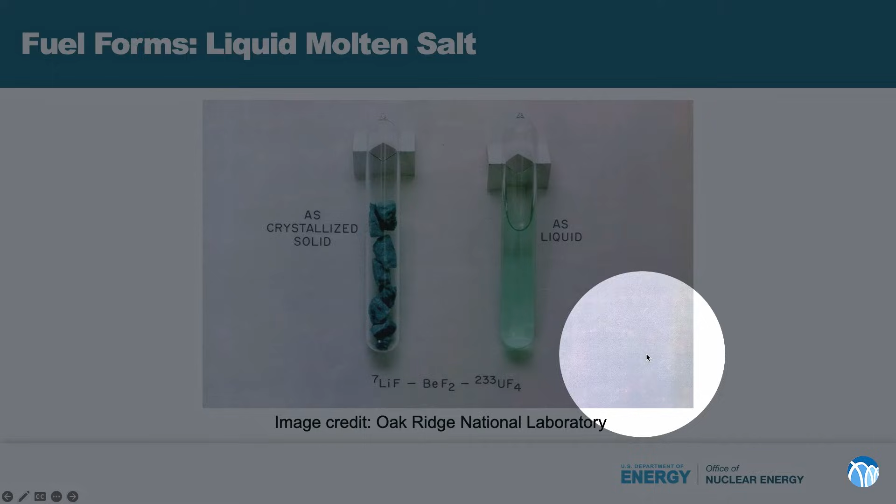Salt as fuel looks kind of like this. It's not very exciting, but importantly, this is exactly the salt that would be used in a fluoride salt-cooled high-temperature reactor. You remove the uranium, and now it's the salt that's cooling the fluoride salt-cooled high-temperature reactor from Kairos.

We just made some really cool salt, so I wanted to show you. Out in Idaho, we do a lot of things. I run a $1.8 billion Office of Nuclear Energy. We drive a lot of research and development, and I get really excited about most of the research we do. This one is pretty historic.

This year, out at Idaho, in support of Bill Gates' TerraPower molten chloride reactor experiment, we created high-enriched uranium salt for MCRE to run in this very secure environment, don't worry. And this is an example of the salt that we made.

This picture was shared with me by the program team, in particular Nick Smith, and it's really amazing because you have to pull the uranium out of its metal form. We do this with a complicated chemical process, then melt it down. This is a very tiny amount of uranium. Then you melt it into a salt, and they put it inside one of our research reactors out in Idaho to start testing the fuel, and they created fissions in a liquid-fueled salt with high-enriched uranium for the first time ever in the world.

We've had low-enriched uranium salts creating fission in reactors, and we've had high-enriched uranium fuels of other kinds, but never a high-enriched uranium salt making fissions inside a reactor. We did that this year. Pretty fun. We have a lot of R&D for molten salts.

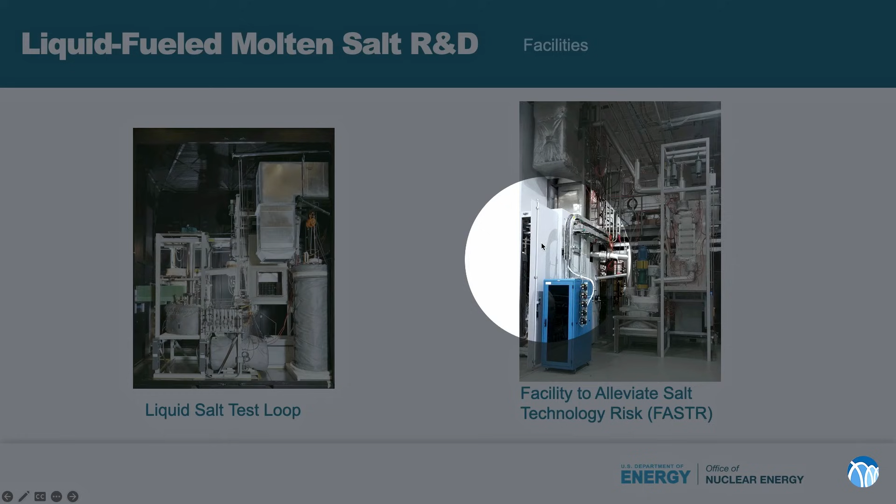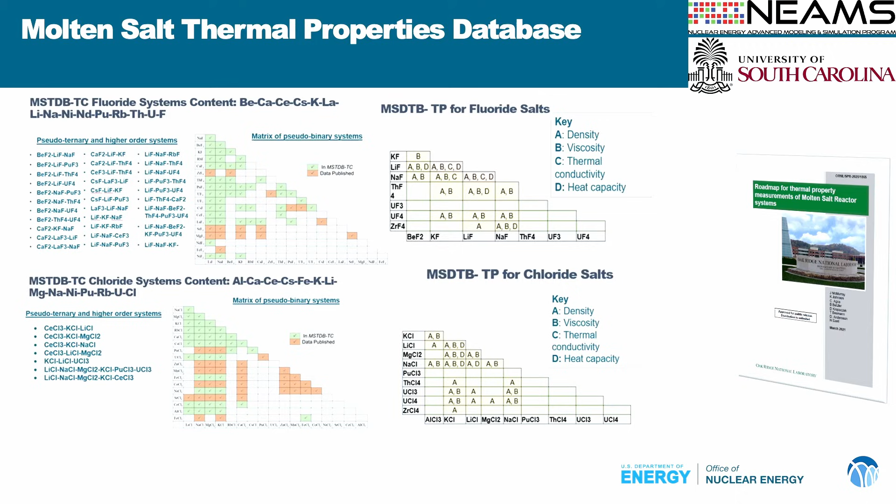I know molten salts are very exciting for people. We have test loops for corrosion, test loops for salt technology risks, understanding pumps and things like that that can be very hard with a molten salt. They're all over the National Laboratory Complex to support molten salt reactor development. But most importantly, we are trying to understand every type of salt people want to use: beryllium, lithium fluorides, lithium, potassium fluorides, rubidium fluorides, et cetera. So we have this huge molten salt database we're developing with the University of South Carolina and our Nuclear Energy Advanced Modeling and Simulation group.

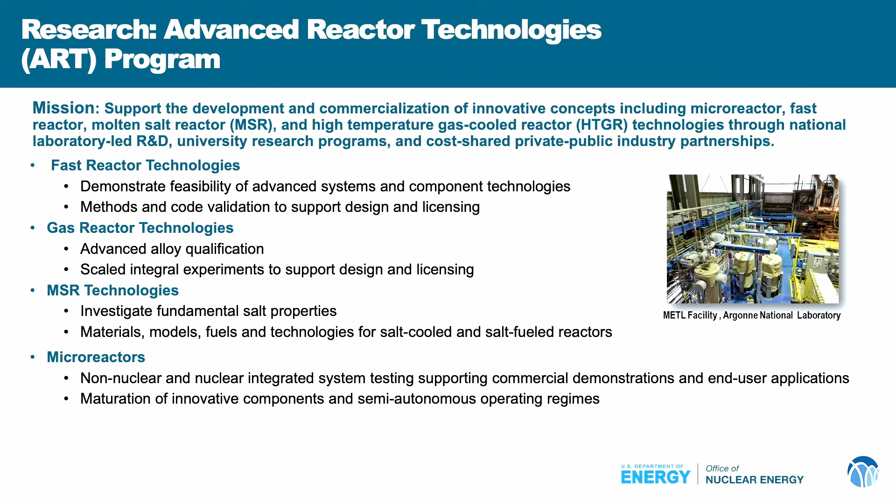We have a lot of stuff going on. It's a huge program. This is just one of my many sub-offices in my office that does advanced reactor technology research. We also do fuel cycle research, spent nuclear fuel disposal research, and we have a number of people doing international cooperation and collaboration. But most of this talk today has talked about the kinds of things we worry about in the context of advanced reactors. This is what they're focused on right now: demonstrating feasibility, advancing alloys, qualifying materials, bringing advanced reactor technologies to the forefront, and helping them meet new operating regimes.

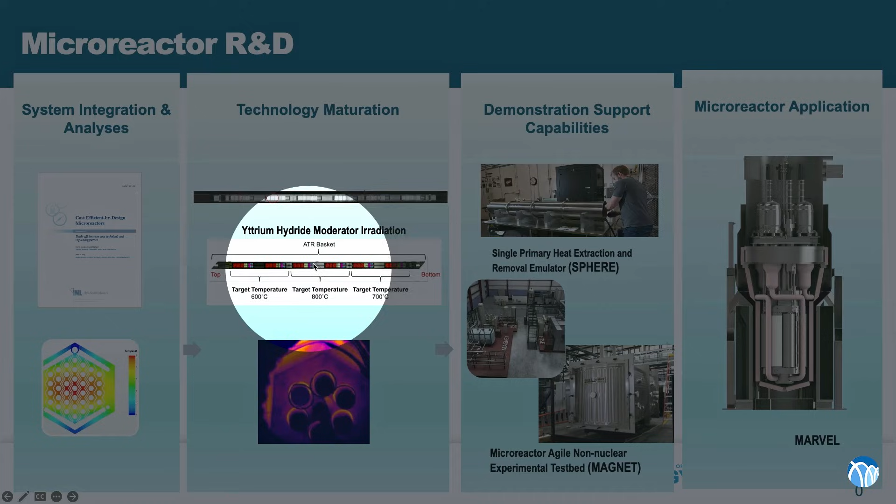It includes that most exciting thing where we're going to get to approve a microreactor to start up in Idaho called MARVEL, but it also includes some integrated energy systems analysis for thermal energy systems, integration with things like EV battery charging, and technology maturation of really clever stuff. Like the next generation moderator is yttrium hydride. So you heard it here first.

Okay, I could go into MARVEL and whatnot, but I think I can see people are fading. One thing I'll just tell you is this: the MARVEL reactor is intended to be not a power production reactor. It is intended to be an experiment to see how quickly we can prototype and develop a reactor out at the labs. We did it 52 times in ancient history, decades and decades ago out in the desert.

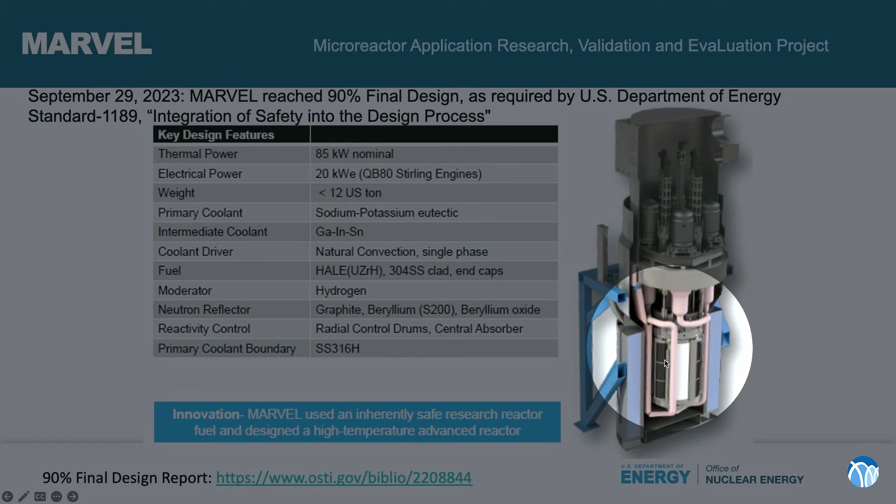It is a new and different regulatory environment. It is a new and different supply chain environment. And we want to demonstrate that we haven't lost the capability to do that. So we're building this reactor out at Idaho. It has Stirling engines on the top, and control drums instead of rods. It's pretty neat. And that's MARVEL, which I just referred to as an integrated energy system capability.

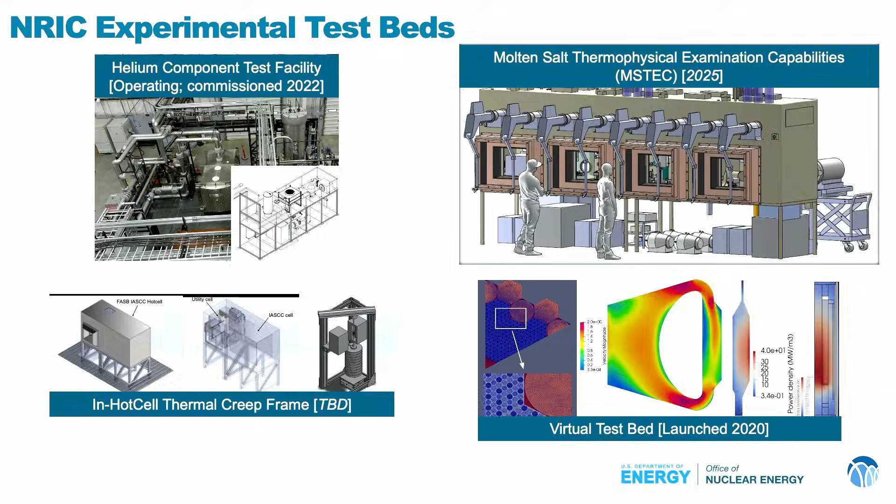We also support a number of test beds for reactor companies to test out some of their important capabilities, whether it's a virtual test bed that helps them simulate the things they need to do, hot salt capabilities for testing their salts, or helium components for testing their helium components. A lot of this is happening out in Idaho at the National Reactor Innovation Center, NRIC.

Thank you. A lot of territory. So we have time for some questions.

Design, and they took that ball and they ran with it. And, you know, this has all been really, really fascinating, but I'm going to ask you as a scientist, but also as a policymaker, at what point do you think, and what would be the time frame that DOE is going to have to basically pick a winner?

That is to say, go all in on a winning design so that you can drive down marginal costs, drive down supply chain risks, do all of those things and really scale it. What's your opinion? Is it going to have to happen at some point, not tomorrow, but at some point?